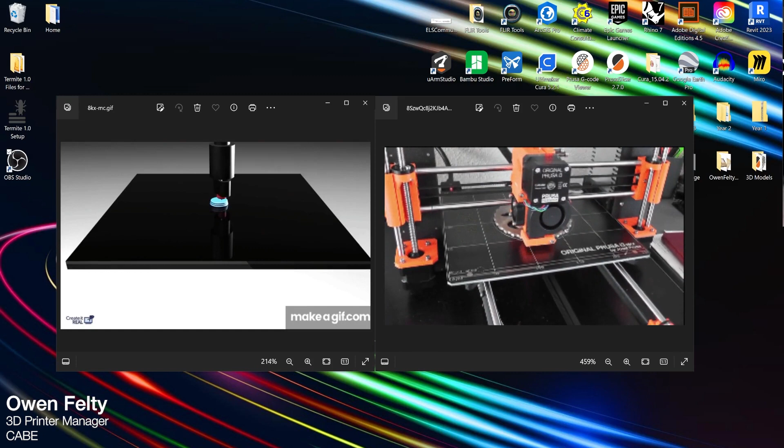Today I'm going to walk you through how to 3D print here at the college. We're going to go through what is 3D printing, how to design for 3D printing, and how to print at our print farm over in Seed. So first we'll start off with what is 3D printing.

3D printing is the process of taking a digital model from either SketchUp, Revit, Rhino, any sort of digital modeling program, and bringing it to real life via a layer by layer plastic fused deposition modeling system known as a 3D printer. A 3D printer works by taking a plastic filament and superheating it through a nozzle so it's liquid and depositing it onto a build plate, doing this layer by layer by layer.

You can see here on the screen, on the left, exactly what the printer is doing. A 3D printer usually works in three axes: an x-axis, left to right, a y-axis, front to back, and a z-axis, up and down. Utilizing all these three axes, we can create basically any sort of digital model you would like with the use of supports and some other things we'll talk about later.

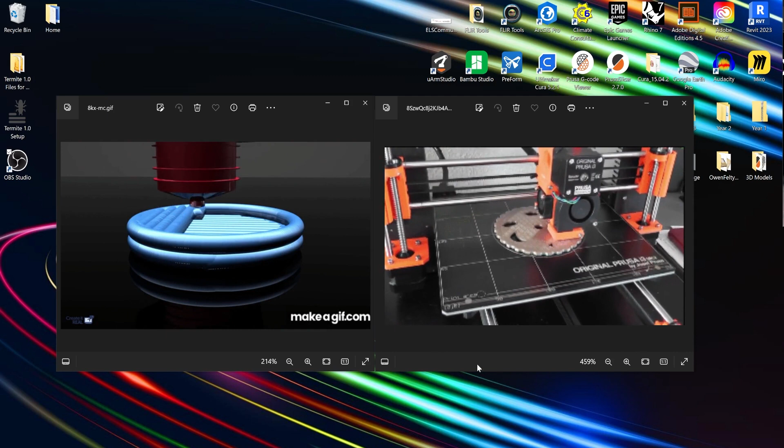You can see on the right here is an actual 3D printer, 3D printing something. These are the models of 3D printers we have in our print farm in Seed. You can also see here another time lapse of how 3D printing works - it's just layer by layer by layer.

3D printing, unlike laser cutting, takes quite a while. The average file we get in the print lab is about 8 to 10 hours. What you use 3D printing for is kind of for fast iterative models, also for very detailed small models as well. You can make some very nice screens on an architectural model with that.

We tend not to make huge, large volumes with them. Those would be better made and faster made at the wood shop. Something like that would take a ridiculous amount of time to make, so we kind of shy away from that. Any print that is over 24 hours we do not allow in the print lab here. So that is what 3D printing is.

Now we're going to move into Rhino. This tutorial is a very basic tutorial showing you how to model in Rhino. We will not be going over any other 3D modeling programs. So we'll switch over to Rhino here and get started with design for 3D printing.

Okay, so here we are in Rhino. You can see I have a basic file set up, and before we get into anything, the most important thing you have to know before you start modeling anything for 3D printing is file setup. Now when you want to 3D print something, I highly suggest making a completely separate file than your digital model is in, and then converting everything over to that, making sure you scale it correctly and the units are right.

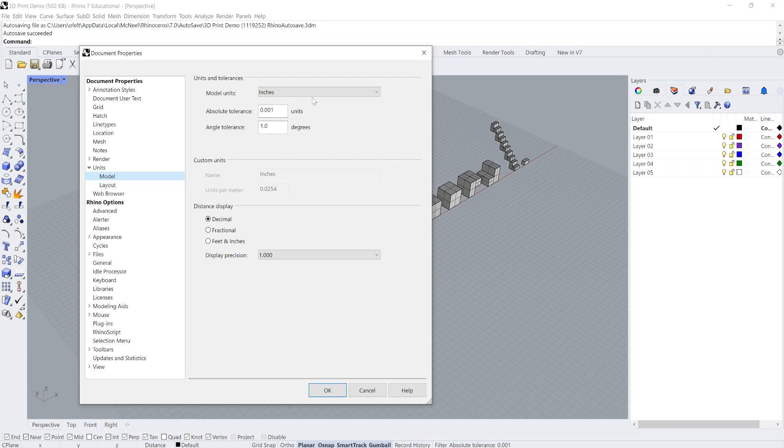With that done, the first thing we should design for is the build plate area. The build plate area of our printers in the print lab is 8 inches by 8 inches by 8 inches. So I have it right here - we have an 8 by 8 square on our x-axis, left to right, our y-axis, front to back, and our z-axis, up and down. You cannot print anything larger than 8 by 8 by 8. The printer will not function, it will not work.

I highly suggest making a little border on the inside, so what we can do is a simple offset, probably about 1/4 of an inch from the actual edge. So really the maximum you should go is 7 3/4 inches, and that goes for the z-axis as well - just so we have enough room and it's not completely right on the edge, because then we run into some build plate adhesion issues.

So we can model within this 7 3/4 by 7 3/4 by 7 3/4 cube. Make sure when you're modeling, everything is to scale. We don't want to bring something in from your digital model and have it be absolutely enormous. You want to scale it beforehand, then bring it into this file, then put it on the build plate.

When you're modeling things for 3D printing, when you're designing things for 3D printing, we have to keep a few things in mind. First of all, is whether your object that you're making is a closed or open poly surface. This is absolutely essential when 3D printing. We call this whether your model is watertight or not. What is a watertight model?

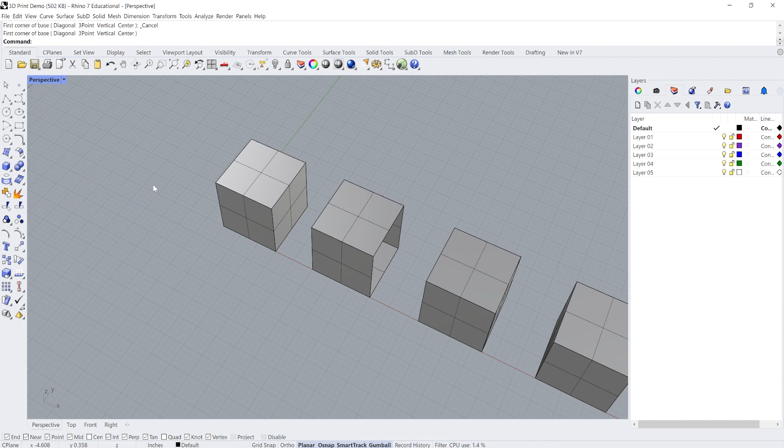You can make a closed poly surface via this sort of solid tool over here. You could do all of your solids. All of these will be closed poly surfaces. You could make a bunch of regular planes and orient them so they make a closed solid.

Kind of like this one right here. This is just a bunch of surfaces that I put together, but you could see up at this top left corner, it still says one open poly surface. If you're not very precise with the way you make surfaces, and again, these cubes are sort of the very basic modeling unit you have, your models are very likely going to be much more complicated than this.

So it might be a little difficult to find these seams. You can see these seams on this one are fairly obvious. The seams you have on yours could be microscopic, and you'll have to zoom in forever to see them. I'll show you a fancy tool that I usually use that helps me see open edges like this.

The reason this is an open poly surface is because there's open edges. So if we do a command called show edges, you can see up here in the top left, and click enter, and then we select all naked edges there. Naked edges is an edge that's not closed. So you can see here, they all highlight in pink. So we can see exactly which edges are open.

You can see we have some little overhanging edges here as well. Those don't matter too much. It's just the ones that make the poly surface open.

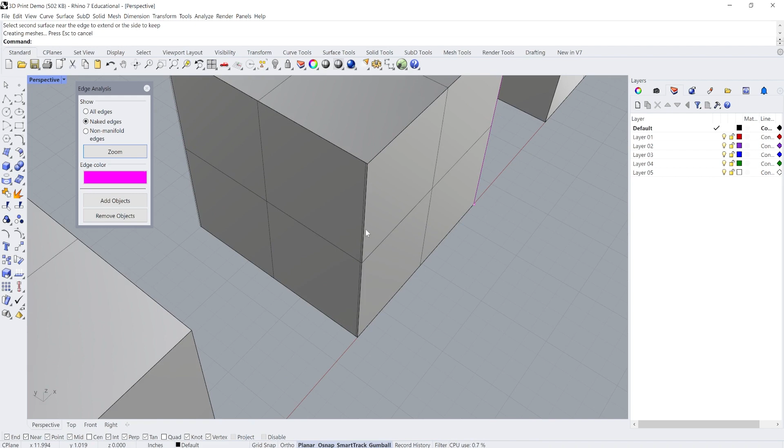So how do we fix this? Well, the naked edges, the show edges command works great with the connect surface command. So we click that, and then we click on the two surfaces that we want to connect. So we click on this surface here and this surface here, and it closes them. And you see they're no longer outlined in pink. This is exactly what we want.

And we do this with the other one over here as well. We go like that. Oh, sorry, I need to redo the command. So I right click to redo the command. First surface near the edge, so we do this one, and there you go. It is if we click on it now, it says up here, one closed poly surface.

Now you may have to do this a bunch of times for your model wherever it shows those naked edges. You can see here, if I click on this model, no more naked edges. They're all gone. You have to do this on your model for every single naked edge there is, or else it will not 3D print.

When we bring it into our other program, the program will not compute open things. If we have open objects like this, made out of planes, planes do not have any sort of thickness. It is just like a piece of paper. You can't print a piece of paper.

There is no thickness. This is a physical model we're making. Physical things exist in 3 dimensions. Planes only exist in 2 dimensions. So the printing program cannot process that. You need to make sure this is the case. And it doesn't have to be with just poly surfaces either. You can export meshes, you can export things, other solids of that nature. They just have to be closed.

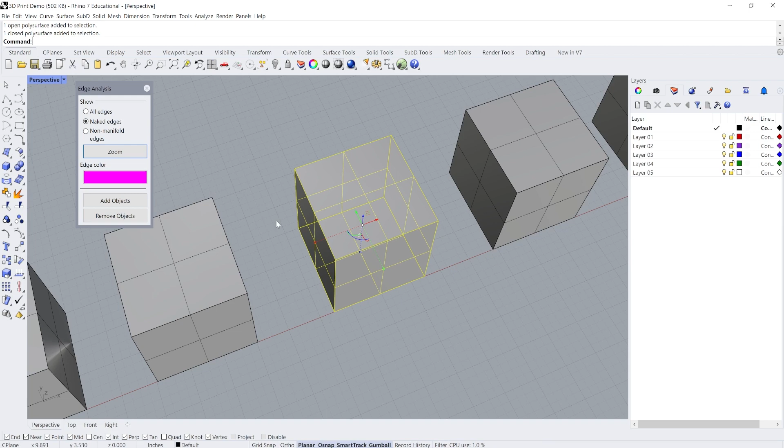Another big issue I see in the print lab is people bringing in things that aren't flat on the build plate. If things aren't flat on the build plate, they won't stick. Build plate adhesion is absolutely essential when we're 3D printing. We want things to be flat, stuck right to that build plate so they don't warp off, especially when it's cold outside.

It's very difficult to tell sometimes that things are flat, but you have to do some thorough inspections. You can just see, as we go down to the surface, this cube is ever so slightly angling back like that. And that's all it takes to mess everything up in your 3D print. So how do we fix this?

We can fix this by using the orient 3-point command. We take the edges that are skewed — this edge back here is mostly skewed, but this edge here is fine. So we use the orient 3-point command: click one point, drag along our skewed edge to another point, then drag along another edge to another point. Now we have all 3 points of this cube, so whatever we orient it to, it will be flat.

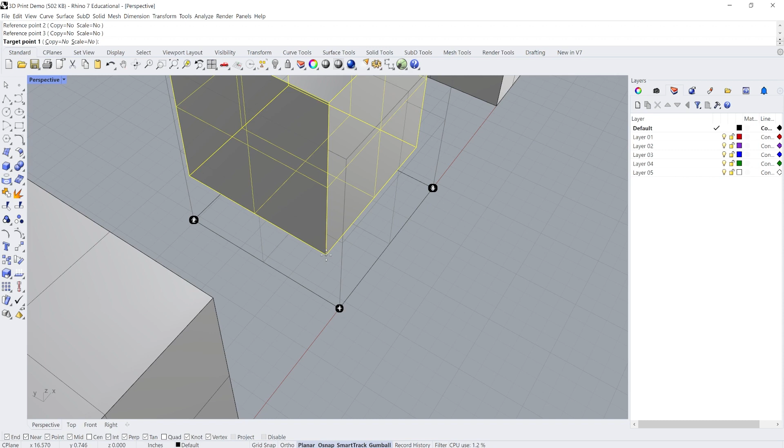As long as the object we're orienting it to is flat — and everything else in this file we know is flat. So if we go to this guy, and then here, and then here, our cube has just become flat now. If we look at it again, zoom onto it, and go down, we can see it's completely flat. That's because the Orient tool mimics all of the points of our flat cube here — it takes all the points we selected on our skewed cube and orients them to the flat points. Very simple.

All right, so that is absolutely essential. You have to remember that.

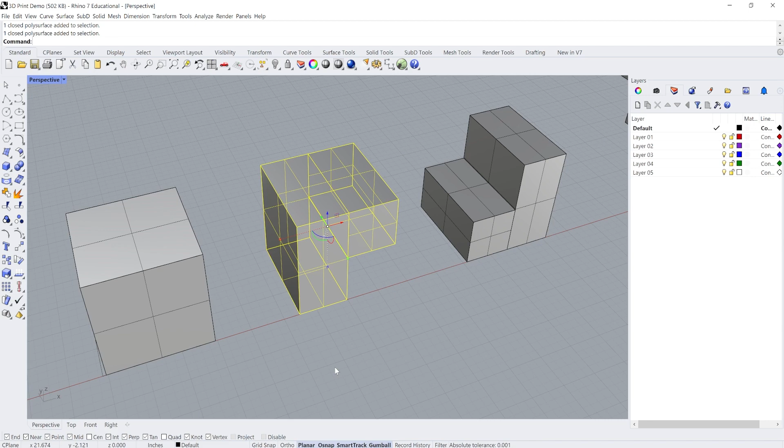Now when we go to something that is overhanging, this is a very interesting condition because it requires a little bit more tweaking — it requires being smart with 3D printing. So if you have something overhanging like this and you're using a 3D printer that builds up things layer by layer, what happens when there's nothing else to build on? When it's building this rectangle, it's building up and up, and when it has to do this layer, there's nothing there.

How does that work? In the slicing program that we're going to bring this into, it will generate something called support material. Support material goes underneath any overhang over 45 degrees. Typically, a 3D printer can print anything up to a 45-degree angle perfectly. Anything over that needs something underneath it — there's just too much of a percentage overhanging at that point for it to be stable. It needs some sort of material.

So the support material is basically just thin, gridded plastic underneath these overhangs that is very easily removed once your print is done. Support material takes a while to print too, because it's also doing that layer by layer — granted, it's not as thick and not as complicated. But if we design smartly for 3D printing, we can minimize, reduce, and sometimes eliminate support material entirely.

Just by flipping this print upside down, you can see there's no support material needed. It's going to take probably a third of the time to print now. Very simple — so if you have an overhang and you can minimize it by flipping something on its side or turning it around, do that. It's going to save you a lot of time. You have to remember 3D printing takes a while — 8 to 10 hours is about the average 3D print for what we do here at the college. You've got to keep that in mind.

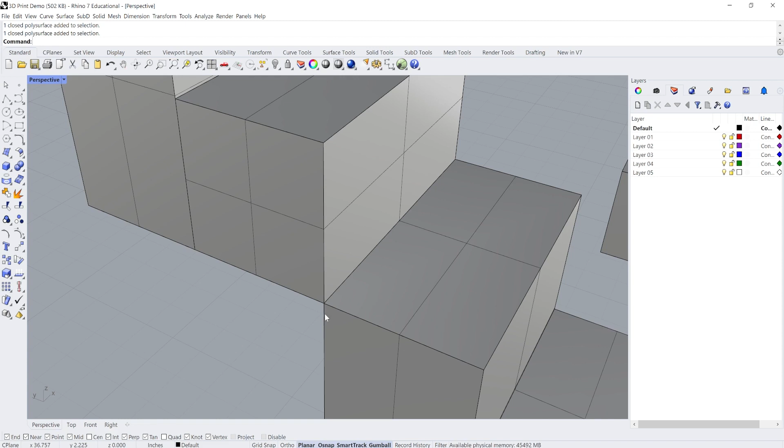So I'll show you here how to do some stairs. You can see these stairs are only joined right here at one single edge, right? But again, we're making a physical model. That is just one dimension that this exists in. It's just one singular edge. It doesn't exist in 3 dimensions.

So when this prints out, it will print this stair and this stair and this stair and this stair and this stair. It won't print them all as one solid staircase, right? To fix that, we could do something really simple. We could just take one of these little cubes, these basic cubes that I just made all of these stairs out of, and just put it here at this edge, and suddenly that edge has dimension, right?

So now, it's all one continuous sort of solid as it goes up here. So it will print this whole thing as one solid poly surface now. And typically with things like this that are a bunch of different pieces, I would Boolean union them before bringing them into our 3D printing program, just so you're making absolutely sure that it's not making any mistakes bringing it in over there.

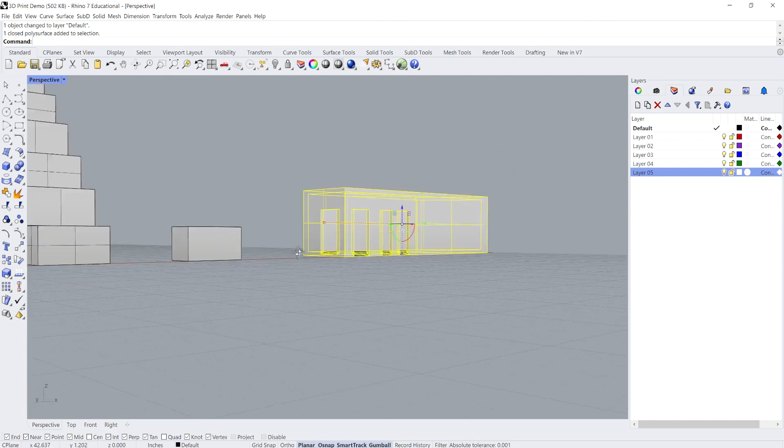Okay, so the next kind of condition we're going to look at is the building condition. We print these kind of volumes a lot at the college, obviously, with sort of walls, a floor, and a ceiling, right? The problem with printing buildings as is, just like this, is they tend to overhang, right? Roofs overhang to create an interior space. It's architecture, right?

But when we're 3D printing something like this, and we have an overhang, that means that overhang needs support material, right? So if we were to print this as is, this entire interior space would be filled with support material. And if we were to print it like that, it would, one, take quite a long time to print all of that support material on the inside, and two, be very difficult to take out. Even with a pair of pliers or tweezers, it would still be very difficult. So what can we do to address this?

Well, I'm going to teach you how to break apart a model. This is essential in designing for 3D printing, breaking things apart to strategically 3D print them efficiently, saving you as much time as possible. So what I suggest for printing building volumes is taking the roof off, completely splitting it from the rest of the model and printing it separately.

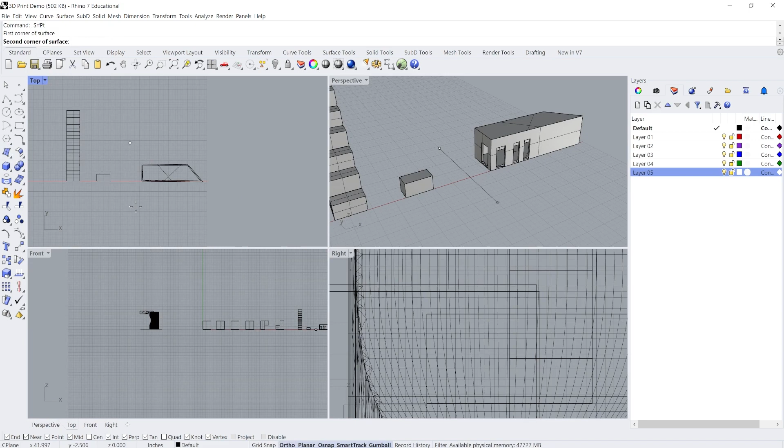So we can do that pretty easily just by making a surface. We can click on the surface tool here. We can go to our top view and we can create a surface that completely encloses the model here. So there we go. It doesn't have to be perfect. It just needs to split the model. So here we have our surface, and now we're going to move it up until we can see that it's clear of all our windows here and that it's solely cutting through our roof here.

Okay, and then it's as simple as just typing in a Boolean split. We select our building, press enter, and then we select our cutting object and press enter. Okay, and now our roof and our building are two separate objects. So if we go ahead and hide our surface here, and we take our roof off, we can see that it's split like this.

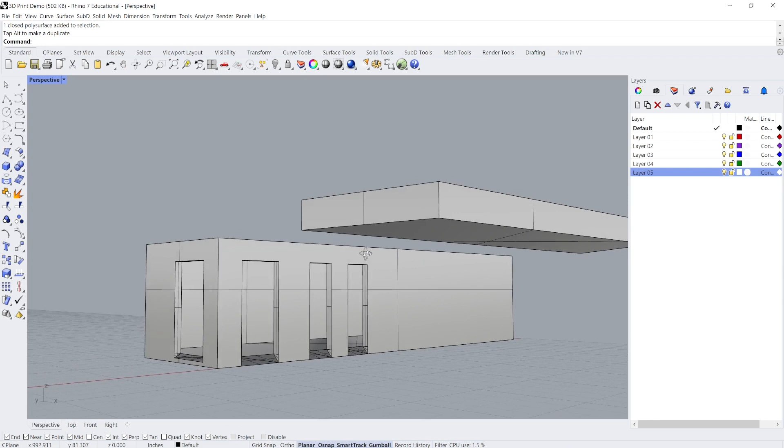Now, we wouldn't print it as is, right? We would take this, first of all, and flip it upside down, because if we had it in the other position, it would still need to be filled with support material. And we could see our roof here is just slightly sloped, right? It's a sloped roof condition, so it collects water. But that means when we're 3D printing it, it's not flat, and not being flat isn't good for build plate adhesion, as I told you earlier.

So we can use the other thing that we learned, our orient 3-point command. We can take our reference point of here. This is the edge that is skewed to here, and we could put it against something that we know is flat, like these cubes over here. So we go here, here, and here. And now we know our object is flat.

So if we move it, we take it over here and bring it over here. We can move it this way, and now these objects are flat on the build plate. Well, this one is turned over again. You have to look out for that when you're using the orient tool.

Sometimes it flips over your object. But there, this is how you would print a volume, an enclosed volume. And then after you're done 3D printing this, you would just take this volume, put a bit of super glue on it, and then attach it to the top. Right? That saves you hours of 3D printing because you don't have to put in that support material.

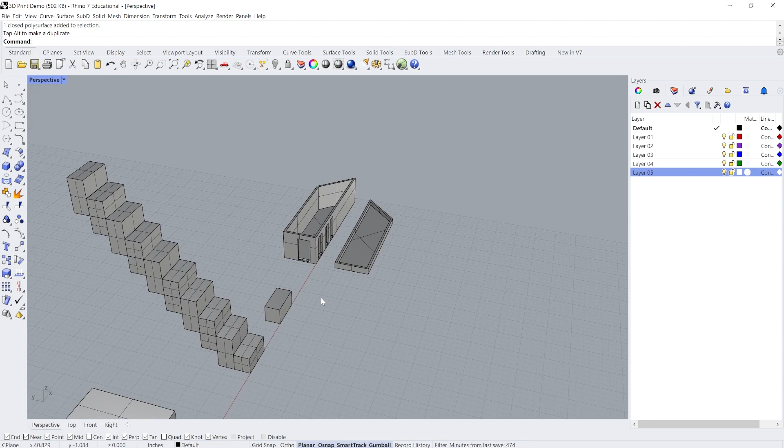So how do we actually export this from Rhino and bring it into our 3D printing program? So what you're going to do is take your volume, click on it, make sure it says one closed polysurface, and then we're going to type in export. This is going to bring you to some random folder. Make sure you know what folder you're bringing it into. I think this one's fine. And then we're going to hit this little drop-down menu here that says Rhino 7 .3dm models.

We're going to change our file format from .3dm, and we're going to scroll all the way down to the bottom where it says .stl right here, stereolithography. This is the file format that every single 3D print should be exported as. So we're going to click that, and we're going to name it whatever we want. I'm going to name it 3D Print 1. And then there we go. Now, this is our other menu that pops up. These are our options for our STL.

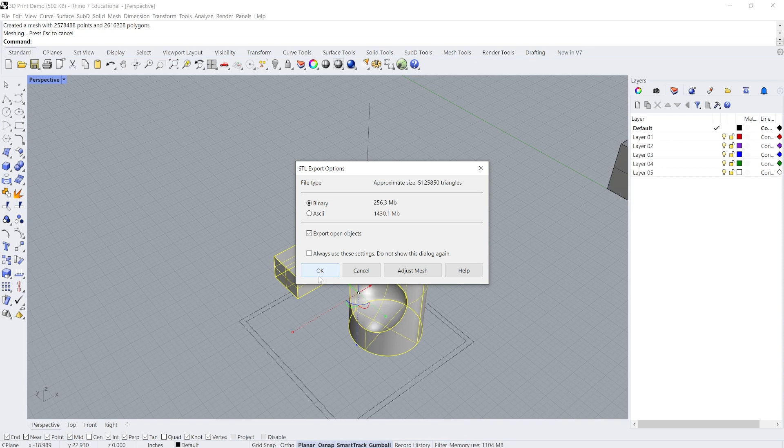I recommend, if you're doing curves and curvilinear surfaces, especially if you're working with SubDs in Rhino, to mesh it first. So turning it from a polysurface to a mesh in Rhino simply by typing in the command prompt mesh and then pressing enter. And then that just simplifies the geometry. If you're running into problems and your STL file is taking forever, mesh it first, then export it as an STL. All right, so back to the STL export options.

This should always be check marked as binary. If it's checked to ASCII, check mark it to binary. And then click OK again. I'll show you here what I mean by meshing something. You just click on your object, you type in mesh, you put in more polygons, and then instead of exporting this closed polysurface, it says one closed mesh, you export this instead, and it should export much quicker. But now, since we have our .stl file, I'm going to take us out of Rhino and show you how to download our slicing software to convert our Rhino model into something that can be 3D printed.

Okay, so now we're going to download our slicing program. Now, what is a slicing program? A slicing program takes our digital Rhino model, or digital whatever model, and converts it into individual layers of plastic. It's called a slicing program because it actually slices your model into 1,000 or so layers of plastic, and then generates a type of code that the robotic 3D printer can interpret and print. And it has a bunch of settings and parameters that you can adjust to make it go faster, make it print in a specific way, things like that.

The slicing software we're going to use is called PrusaSlicer. So we're going to go in Google and type in PrusaSlicer and press enter. I'm using Chrome here, so it should be the first link. You'll be brought to this page upon clicking on it. And right here, you'll click download for Windows. Everyone should have a Windows laptop, so everyone should click download for Windows. And you'll just wait 10 seconds. See down here, there's a countdown. Don't put your email in. They try to get your email. Don't let them.

Also, it will create a shortcut on your desktop, and it looks like this right here. It will install two things: PrusaSlicer, the actual app, and PrusaSlicer G-code viewer. We don't worry about this for now. We'll just worry about this. So once you have it downloaded, it should open up automatically. I'm just going to open it up here for you.

Alright, once you open up PrusaSlicer, you should be prompted with this screen. This is a configuration wizard. This is going to install the presets for our specific printers that we have in the laser lab. So we're going to go down here and click next. I think by default, PrusaSlicer has one of these buttons here checked. I think you should uncheck one of these buttons that are up here.

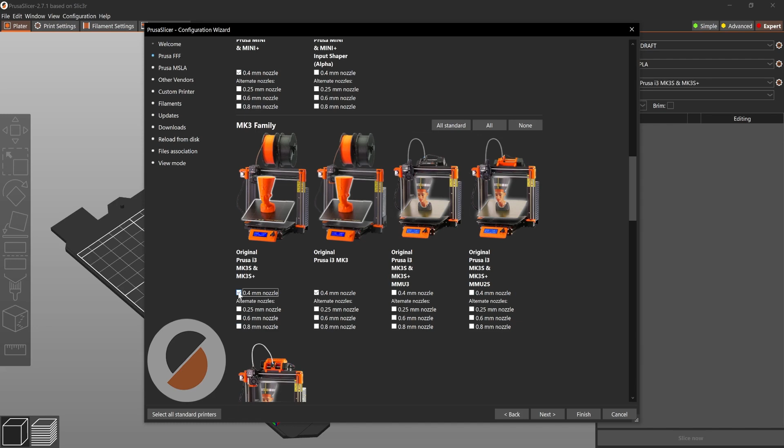After you do that, we'll scroll down until we see Mark III family. You can see it's right here, Mark III family. The printer we have is this first one here, the Prusa i3 Mark IIIS. And we're going to check mark, I already have a check mark here, but you have to check mark 0.4 millimeter nozzle, never 0.25, never 0.6, never 0.8. All of the printers we have are 0.4 millimeter nozzles. So after you do that, you can click finish, since that's the only printers we'll be installing.

And then you are prompted with our configuration view here. Now, this is kind of very similar to Rhino. You can hold right click to pan around. It's actually the opposite of Rhino, sorry. You can hold right click to pan around, and you can hold left click to rotate around our build plate here. This is that 8-inch by 8-inch by 8-inch build plate we have. This is what it'll look like when you go into the print lab. It'll have this little title here of what the printer is and this grid on it.

You could tell you're on the right printer by it saying Mark III. We may be getting Mark IV printers in the future, and you'll be able to determine which printer you have because it will say Mark IV here instead, and then we'll just install the preset for a Mark IV instead of a Mark III by going up here to configuration wizard, press don't install, and then running through the configuration wizard and check marking the Mark IV printer right here at the 0.4 millimeter nozzle.

Okay, so right click to pan, left click to rotate around the build plate here. And then we can bring in our model via this cube with the plus sign up here. So right now you need to go find where you saved your model. I believe mine is here. And it's in here, and then there it is. It'll look like this. This is a PrusaSlicer file. It's your STL file, and all you have to do is press open. Might take a little bit to load in.

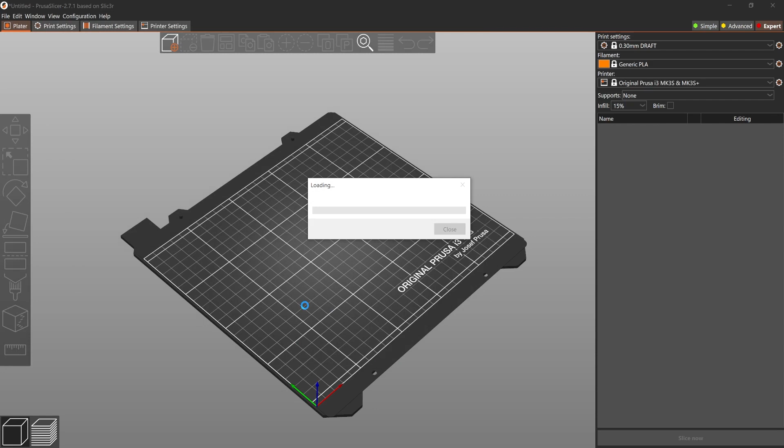Just be patient. Now, my model has come in very, very small, even though I correctly scaled it and put it on the build plate and everything in Rhino. That is perfectly fine, okay? Sometimes it does this. Most slicing programs work in default millimeter units, right? I have you start in inches in Rhino because most of the time, it converts it over into millimeters just fine, brings it into scale. Sometimes, though, it brings it in very small. There's a very easy fix for this.

You can see right here on the bottom, it says scale factors, and there's three 100s. That means your scale is at 100% right now. So if we change this from 100% to 2,540 and press enter, it scales it uniformly, and that 2,540 is the scale factor from millimeters to inches. So this, right now, is at the correct size we scaled it in Rhino.

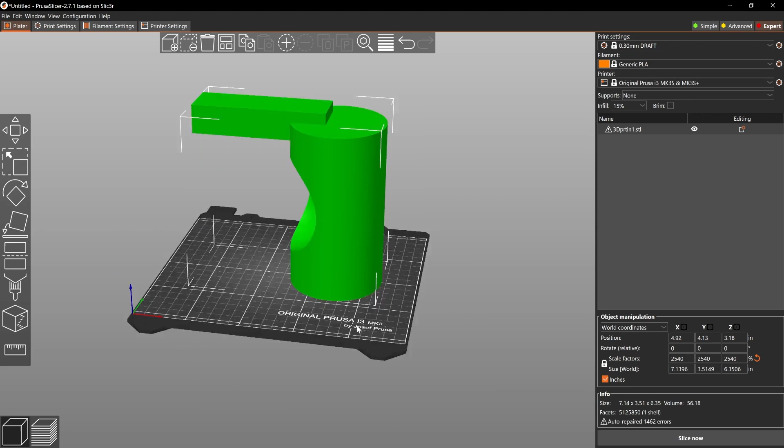Alternatively, when you bring in your model to Prusaslicer and it correctly interprets it from inches into millimeters, you should be prompted with this screen. It's very simple, this screen. All you have to do is click yes, and it brings it in inches just fine. Okay? And we can go around it. We can see what it looks like. Now, it's green right now. Green is good. That means it will fit in the build plate.

If we have it just outside the build plate, it turns blue. Right? Same if you click off of it. If you click off of it, it turns orange. That just means you don't have it selected, right? Just like something in Rhino turns yellow when you select it, right? And if we put it outside the build plate and we deselect it, it'll be blue, okay?

Now, to easily arrange something on the build plate, you could click this little square within squares up here. It says Arrange. You just click on that, and it puts it right in the build plate here. Simple as that, okay? You could use your pan and rotate tools to look at your model every which way, make sure everything is fine. I'm not seeing any gaps or anything like that, so our model looks good.

Okay, now we'll run through a few settings here on the right. This is what gives you most control over your 3D print. These are things that will affect time, quality, how it looks, everything. So the first setting we have here is our layer height. Now, what is layer height? You know how this slicing software is called a slicing software because it slices it into a bunch of individual layers of plastic. Well, those individual layers of plastic can be different heights.

The lesser this number is, the more layers there'll be because each layer will be very thin, so it has to build more and more up to build your model. The greater this number is, the less layers you will have. So right now we're on 0.3 millimeter draft. So each layer is 0.3 millimeters, so that means there's less layers than 0.05 millimeters. Right now, the quickest one is 0.3 millimeter draft. So the less layers you have, the less time it needs to print, right? The more layers you have, the more time it's going to print. If you're running into time issues for your print, the easiest way to reduce time is to adjust layer height.

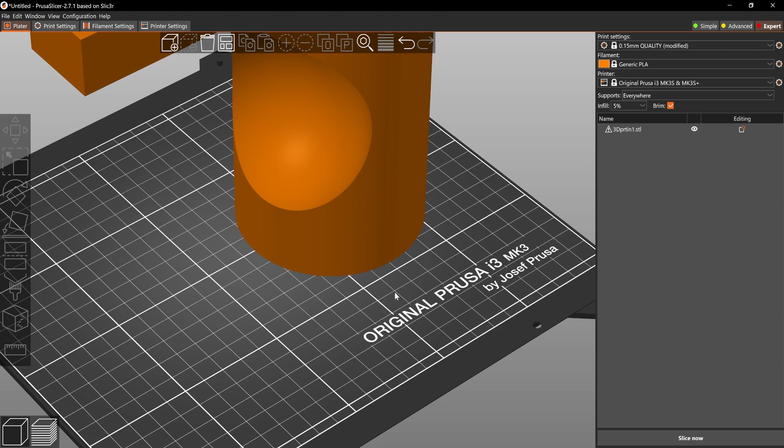In cases where you don't want to have brim checked, if you're doing very, very tiny things, especially like little screens or little strips or something, you don't want to have a brim on that because that'll be very difficult to take off later. But for something like this, big massing models, you definitely want a brim on there, or else this thing is not going to work.

Right, so this should be your default settings. For this print, I'm going to put it on draft as well. I'm going to click transfer as well. Anytime you change a setting, you have to transfer all of them. So yeah, these should be your defaults as you're going in to do a 3D print here in PrusaSlicer. Now to actually convert it from your digital model into physical layers of plastic, we go down here to the bottom right and hit Slice Now.

Give it a minute, you can see the progress bar down here. Sometimes it takes a while for this model since there's some curves and it's a bit larger. I should have meshed this beforehand before exporting it as STL in Rhino. Do as I say, not as I do. But we can see it ghosts out here when it's slicing. As long as it ghosts, that means it's slicing. So the second it turns solid here, we can see its sliced view.

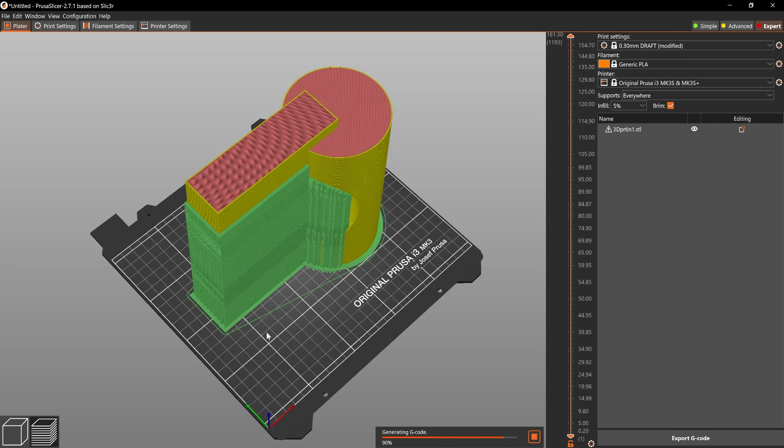You can see this operates in the same XYZ as Rhino. You have X, which is left and right. You have Y, which is back and forth. And you have Z, which is up and down. Wow. That is a lot of supports. You can see all of the supports here are in bright green. This is that gridded support material that it creates on all overhang conditions over 45 degrees. You can see this is over 45 degrees here, so it creates support for the inside of this dome.

You can see also the model looks kind of stripy and weird right now. That's because it's displaying it all in individual little layers of plastic. The orange are exterior perimeters. The yellow is an interior perimeter. Red is simply the top plate. Blue is an overhang perimeter. And this turquoise down here is the brim. You can see this little brim that sticks to the model to make sure it sticks to the build plate. And there's this other turquoise element that goes around your entire model. That's a skirt.

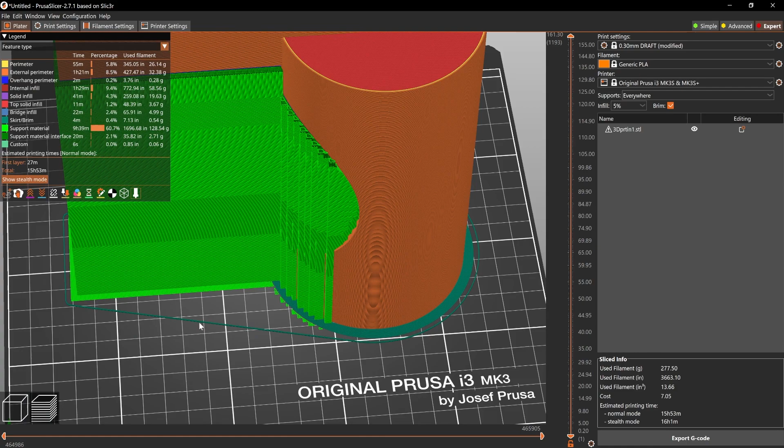To know that your model is entirely flat, to make sure there's no parts sticking up, and that you've oriented it correctly in Rhino, you can check by seeing if your skirt goes all the way around your entire model. If it doesn't, it would go through this cylinder halfway, meaning your model is skewed. Mine is perfectly flat, so it goes all the way around on the edge, so we know it's flat.

Another way to check if something is flat, and to check our infill density, is to scroll through each individual layer of plastic it's going to print. You do that by holding left click on the little arrow up here and dragging down. You can see it drags through each layer, showing the infill grid pattern in red. If we go down to the first layer, it's entirely flat here, with no skewing or angle. It is completely flat, which is exactly what we want.

This purple is the solid infill on the bottom, and we can go all the way up with that red infill showing. I can show you how we can change our infill.

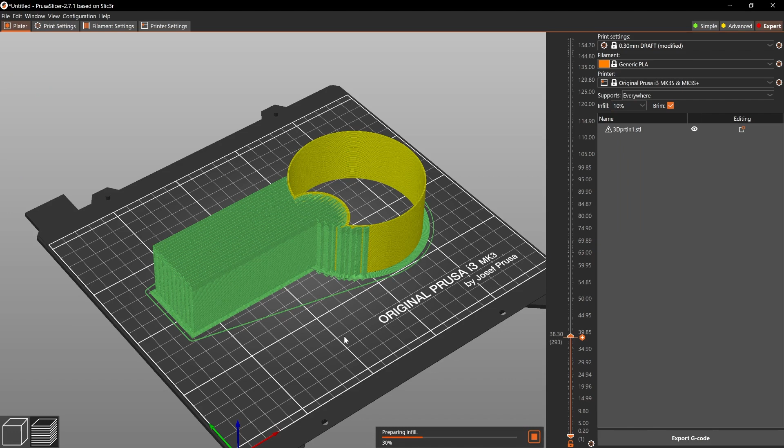We could bring it up to 10 instead. Every time you change a setting, you'll see it goes yellow and all the information up here disappears, so you have to reslice it. You click slice again at the bottom right, and we wait for it to slice again. It might take a little bit, so be patient. You can see the density of our infill grid has increased, and that will affect your time drastically.

Right here you can see our total time for the 3D print is 17 hours and 11 minutes. Beforehand, when our infill was at 5%, less dense in the middle, it was at 15 hours. So just bumping it up to 10% cost us 2 hours of time.

So you have to be very particular with the settings you use. I'm not going to put it back down at 5%, keep it at 10%, and bring our layer height down to 0.15 speed, then click transfer to slice the whole thing again. I'm going to show you just how drastic the time changes just by changing our layer height—it'll probably go from 17 hours to well over 24 now.

We're halving that layer height, so there's double the amount of layers to print—it probably went from 1,000 layers to 2,000. Now at 20 hours, we just added 3 hours to our total printing time. So now you can see the effect these settings have on our print.

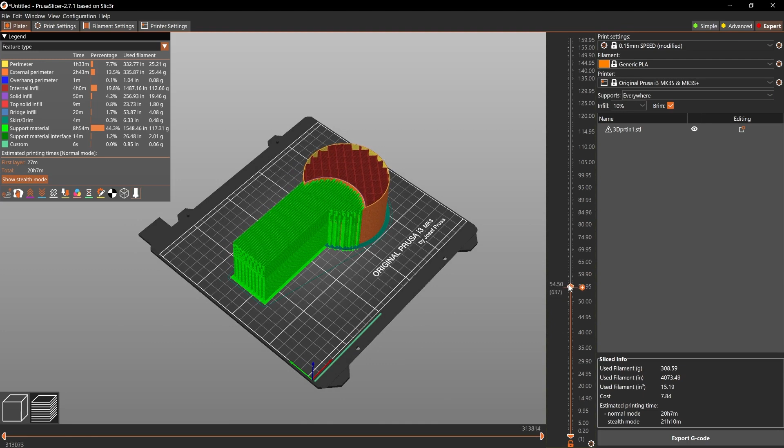We can scroll all the way up through our layers to complete them. Right now you can see the time breakdown of each component of your 3D print—the perimeters in orange, the tops, and you can see our support material is taking up 8 hours of time. Now there are a few different types of support material patterns to reduce your time.

The way to change the support material configuration is to first go up here—I'm sure yours says simple. These are just different types of settings: simple, advanced, and expert settings. What I want you to do is click on expert settings. I'm already on them, so when you click it, some things should change and look more like this.

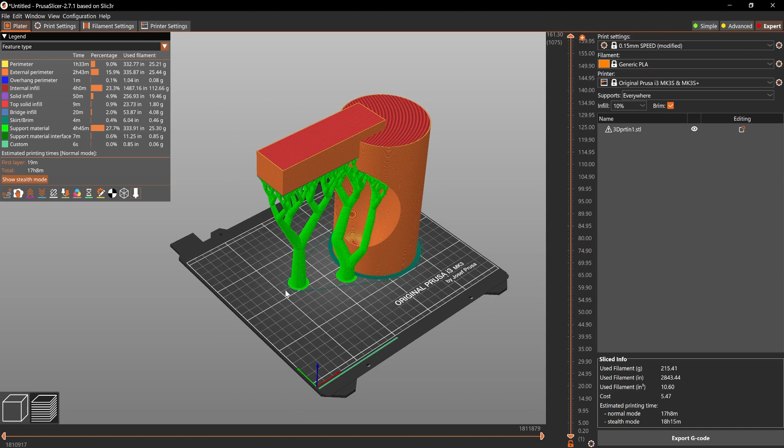After that, we're going to go into print settings, then down to support material. From there, we'll see where it says grid next to style, and we're going to switch to organic. Organic supports create strange tree-like branches from the bottom of the build plate all the way up to our overhang condition. I highly recommend organic supports for overhangs that are significantly above the build plate. For things with low overhang on the build plate, a typical support pattern is fine, but for something this high above the build plate, it's much more time efficient to do a tree, or organic, support.

You can see here the weird sort of tree branches it makes as it goes up. This conserves a lot of material, and it obviously conserves a lot of time as well.

There's another type of support pattern for if your overhang is lower on the build plate. So instead of organic, we can go to snug. These generate the more typical blocky, gridded type of support material, but they are much more easily removed than the grid type, and they take a lot less time as well. They're not nearly as dense. I suggest never using the grid style of support material, never using this setting. Always use snug or organic, depending on your situation.

We wait for this to slice again. You can see this takes 18 hours now. With this support material, it doesn't look quite different from the grid, but I promise you it is quite different. Much easier to remove.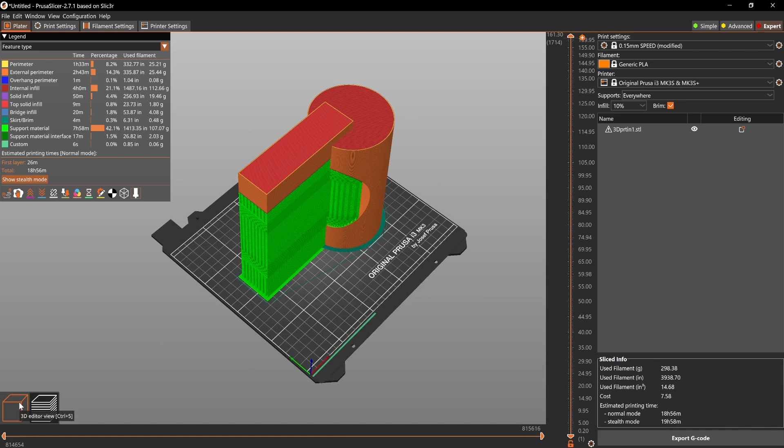To return to our configuration view, we can click on this little cube at the bottom left. This cycles through from sliced view to your regular configuration view, and you can go back and forth. Down here as well, when you're out of your sliced view, you can see the total time.

Right now we're going to click on our model, and we're going to see a number of tools over here. Now that we're in expert mode, we can see all of our full tools. This first tool is simply just a moving tool, so you can move left and right, back and forth, and up and down as well.

This is our scale tool. If things come in at a weird scale, if you want to make things a little bit bigger, but don't want to go through the process of going through Rhino, if it's not something that needs to be very precise, you can just scale it here in PrusaSlicer. Or if something's just a little too big, you could bring it down just to make it print. We can scale it way down, or way big, or scale in one direction, or another direction. You don't want to ever scale in these directions unless you're doing something funky. You always want to scale diagonally with these orange cubes, so you're scaling uniformly.

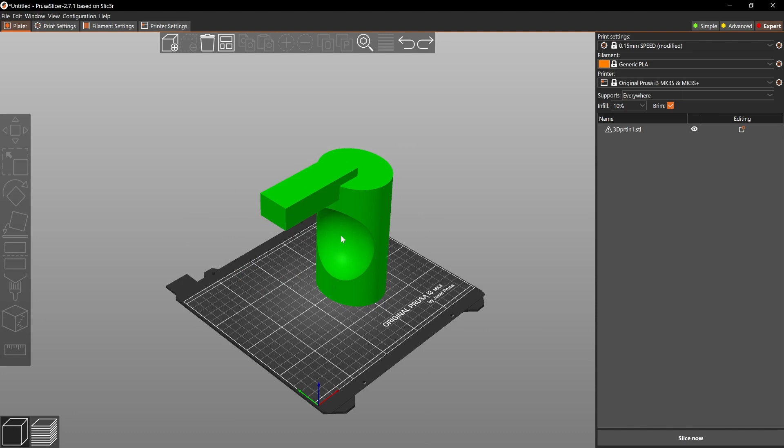I don't really suggest scaling things here directly in PrusaSlicer. I would much rather do it in Rhino instead, especially for something like a final model that needs to be very precise, and then just tweak it from there as you go along.

The next tool down here is our rotate tool. It's kind of like a gumball tool in Rhino. You can left click and hold this green box up here, and rotate along that axis. If you want to snap to a certain degree, you hover over the white line, and it snaps to every 5 degrees. So if you want to snap to 90, you hold over the 90, if you want 180, you hold over the 180, and so on, for each angle.

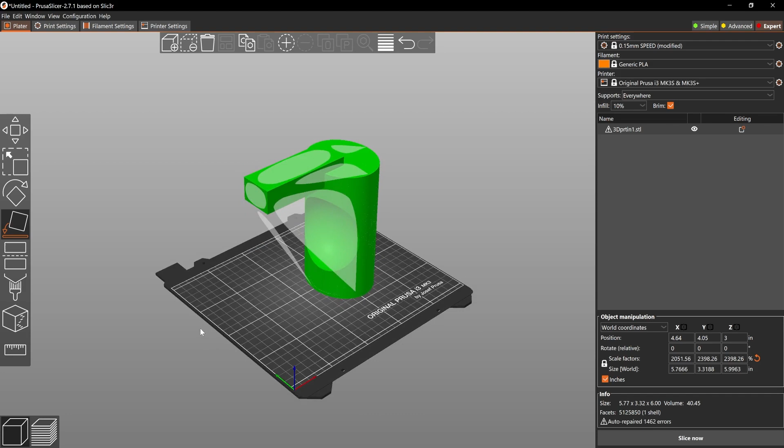Below that is the place on face tool. This could be very helpful if you didn't quite orient something correctly in Rhino. It gives you varying faces of your model interpreted from the STL file. You click on this white surface, and it orients it on that surface. If we click to this surface here, it orients it on that one. If we click to this one here, it orients on that one. If we want it flat again, we click on the bottom and it orients on that one. Very simple, and very easy in a pinch if you're doing things quickly.

Like if you're doing the roofs to your little building, like I did in Rhino, where you're cutting them off and rotating them over, if you didn't bring it in right, rotated the wrong way or something, you could use this tool to put it on its other face, just like that, or put it on this face, just like that.

Another very valuable tool is the cut tool. You can cut things here in Prusaslicer. I don't really recommend doing this unless you're doing fun models that don't need precise calculations to fit into each other. For quick last minute things it's fine, but I recommend doing precise cutting in Rhino instead.

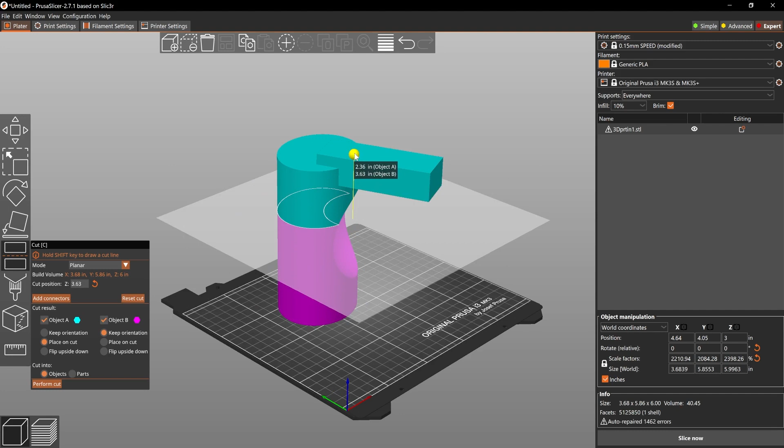If you do need to use this tool, you can hold left click on this little ball and it'll go up and down. If you need to rotate the cutting plane, it works just like the rotate tool. You hold left click on one of these arrows and snap to one of the white lines, in either direction.

Once you're at the angle you want to cut, you go down here and click Perform Cut. There are a few options here I won't get into, but you just hit Perform Cut. It'll take a minute because it needs to interpret the new cut mesh. And there, it has cut it into two pieces now.

We'll click off of them, and now we can click on them and hold left click to drag them around however we please. So they're two separate pieces, two separate files now. I'm going to undo that because I don't want that, but that's just showing you how the tool works in case you want to do something like that.

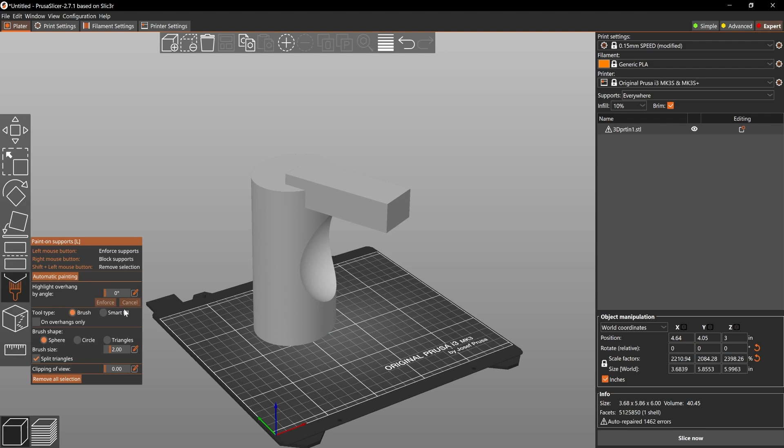Below that is the Paint on Supports command. This is essential if you don't want to use the auto-generated supports that exist within Prusaslicer. They're very important if you need to do very precise supports only on a few surfaces.

You can see there's a little dark sphere brush I have selected. Down here it shows our brush shape, our tool type - we have a brush and a sphere. We can change it to a simple circle, or to a triangle. Our whole STL file is tessellated, meshed, made up of triangles, so we can select one of those triangles if we want.

What I like to do is not use a brush, and go down here to the Smart Fill command. Instead of doing a small section, it does the whole face - it interprets the different faces from your mesh, so you could do it like that instead. If you want to remove your selection, you hit Remove All Selection, and it deletes all of them.

Right now it's generating supports here, and maybe I don't want them to generate. Instead of left clicking to enforce supports there, I can right click to exclude supports there, so it goes red if you don't want supports. Now, to put this enforcer into effect, I have to switch supports from everywhere to support enforcers only - we're creating different types of support enforcers.

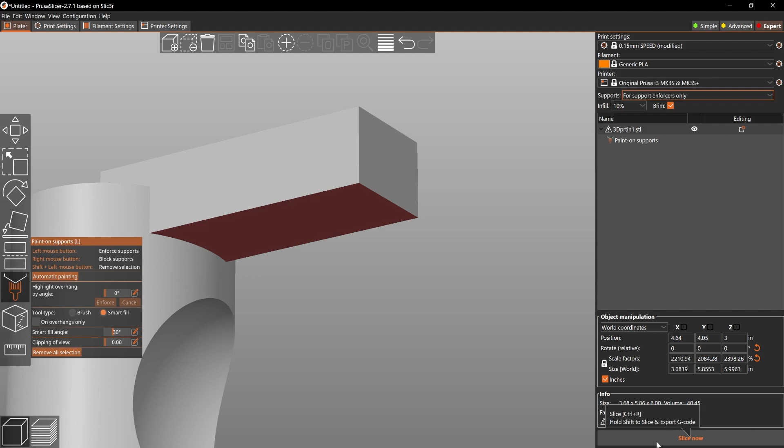So if we slice it again, and wait, now as you can see there are no supports on our overhang. Obviously you wouldn't do this in a realistic situation because it wouldn't print, but I'm just showing you how the tool works.

If we go back into our configuration view now and change this from red to blue, we can have our supports generate again. Just like that, they're back.

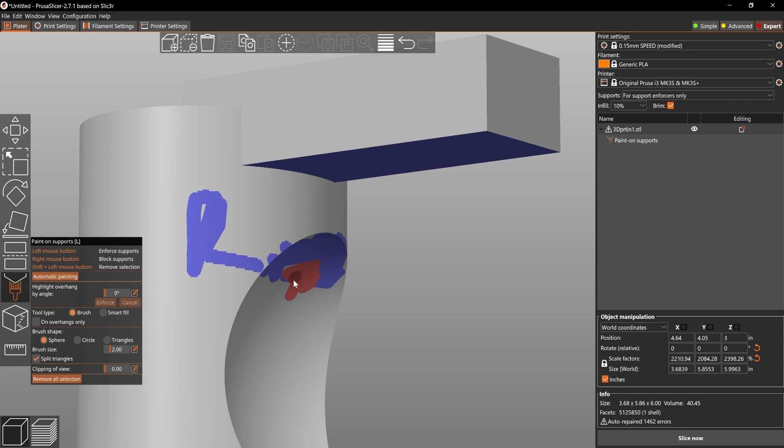We can go back to our configuration tool, and instead of using Smart Fill on Paint on Supports, we could use the brush. With our sphere brush size selected, we can paint on supports instead, and it does the exact same thing - it generates supports where it's blue, and where it's red, instead of holding left click we hold right click, and it doesn't make supports there.

You want to make sure you're doing this on overhangs - if you do it just on the wall here, it won't do anything. So I'll now remove all of my selections, and make sure if you're not doing supports anymore, you change it back to supports everywhere.

Okay. And below that is seam painting. We're not going to get into that today. And you can also use a measure tool here in PrusaSlicer, just to measure certain distances from here to here or from up to down. You shouldn't really need to do this. You should know other things because you'll have your Rhino model open as well. But just in case, here it is.

Before we go and actually print this in the laser lab, what I'm going to do is save this file. So all I'm simply going to do is go up here to the top left and hit Save Project As. Okay? You can see I already saved a previous version of it, but I'll save another version of it, so we'll just call this 3D Print Video Demo 2222. And this will save it as a .3mf file. Now, we'll press Save,

and it should save. Now it's important to know that this is not the file you will put on the 3D printer. When we go into the laser lab, what we should do is open up this .3mf file. And then from this .3mf file, we will hit slice, and then we will wait for it to slice. Okay, this is the file that you would like to save onto the SD card once we're in the laser lab. But we'll get into that once we're over there.

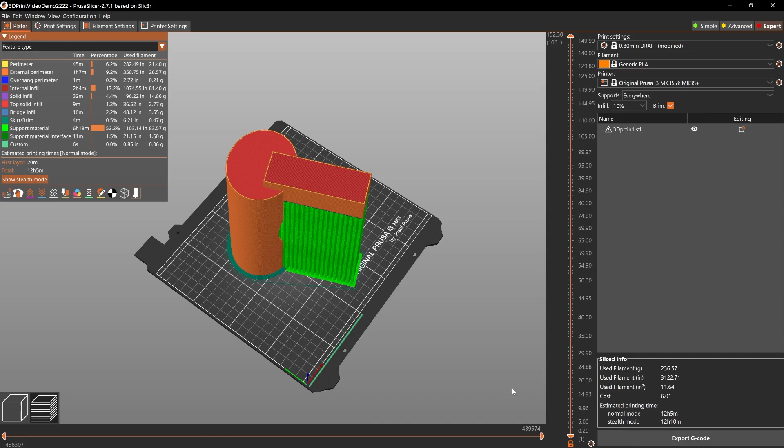Okay, so here we are at the Seed Center. The Seed Center is located behind Deck and Reichland House here at the end of this road. This is where our print lab and laser lab facilities are located. To get into the Seed Center, of course, you need your campus ID, which I have here in my wallet, and you just scan the door and it opens. You have to do this a second time, and the door opens again.

So once you're in Seed, you'll go straight back this hallway, and then right here, before the vending machine, we'll take a left. Here are the doors leading to the laser lab. You'll also need your campus key to get into this room. Mine is inside my wallet again, and you have to scan right here. The door opens, you turn, and you push to open.

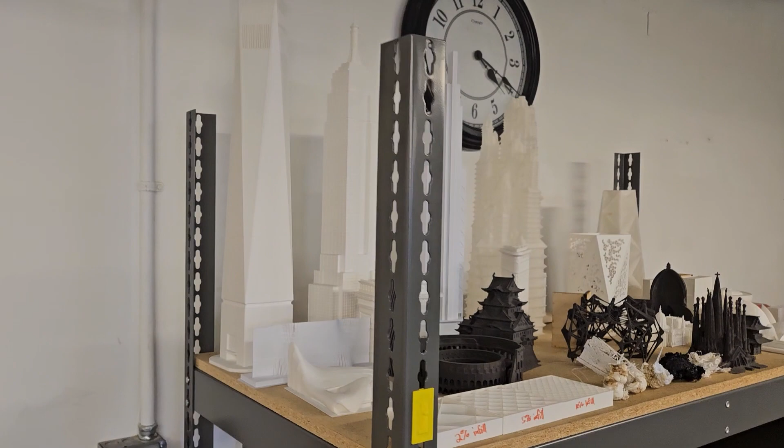So here we are in the laser lab. Our laser cutters and our laser cutter storage system is over here. And here is the stacks for our 3D printers. Now, some of the first things you'll notice when you come into the print farm is that there are a few models over here showcasing what 3D printing is capable of. Here are a few examples of infill patterns like I showed in PrusaSlicer. You can see we have 2%, 5%, and 10% here in real life. You can see that grid pattern on the inside of the model.

You can see a few other examples of things that we can do. We could print very delicate screens, curvilinear formwork here, and then huge multi-part skyscrapers here. This is, I believe, in 3 parts. There's a bunch of different things you can do. These gray prints here are with our powder printer, which is right over here, and there will be a separate tutorial on how to set up files for that.

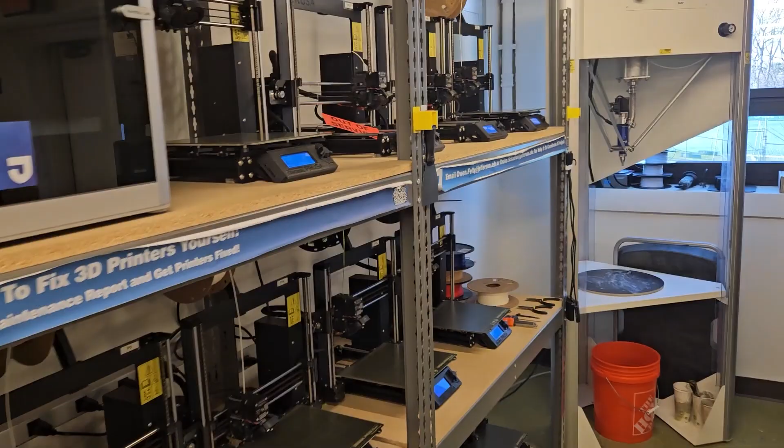Okay, so going away from that and over to our actual print stacks right here. This is where the majority of our 3D printers are. I believe we have 14 of them right now. These are our workhorse printers. These are our Prusa MK3S's, like we set up in the video. This is a specialty printer up here. There will be a separate tutorial for file setup on this one. It can print very quickly, and it can print with multiple colors of filament. That's what this thing up here does.

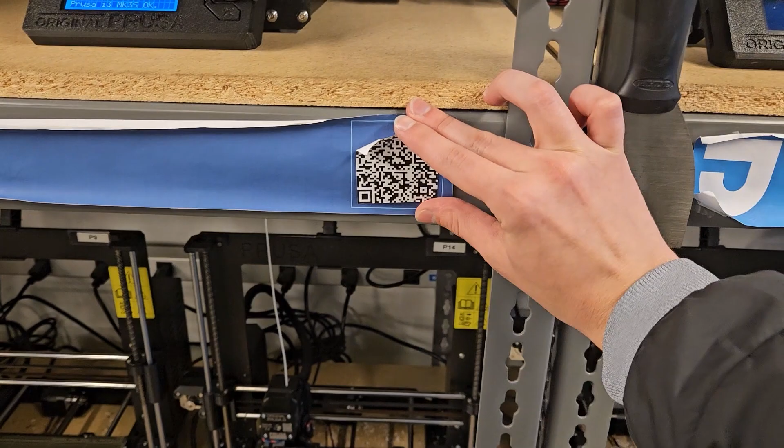Okay, some other things to note are, of course, these signs here, right? If you need any help with anything, mine and Drake's email is right here. You can shoot us an email if there's any problems with anything you encounter in the print lab. But if you do encounter some problems with the printers themselves, please, please, please submit a maintenance report by scanning this QR code here. It's right here. These signs will be replaced. Right now they're not in the best condition. Those will be fixed pretty soon.

Okay, and here are our 3D printers. Here they are. You can see right there, it says Prusa i3 MK3S. Okay, so this is what you want to be looking for. And it's not running right now. There's nothing going on it. This is the machine we will want to use. You are free to use all of these machines as long as they are not running. As long as they're stopped like they are right here, it's perfectly fine to use. Even if it has an SD card in it, like this one right here, as long as it's not running and there's nothing on it, you're free to take the SD card out and use it.

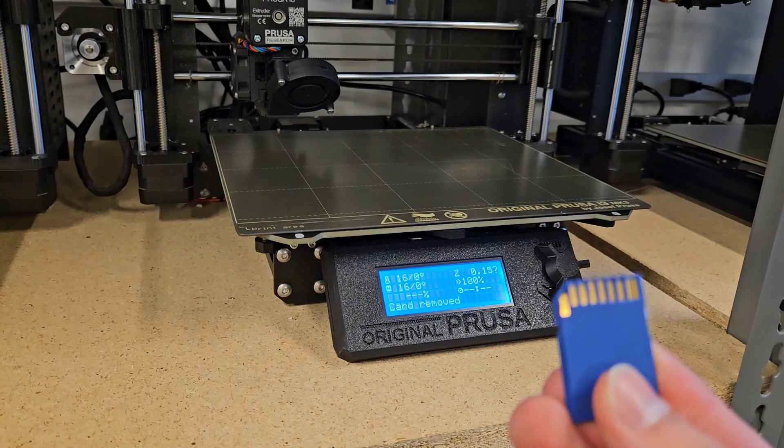Additionally, if you see a 3D printer that is either off, so the screen is off, or has one of these tags on it, that means that the printer is not serviceable. Please do not touch it. Please do not try and use it under any circumstances. It is broken and requires substantial amounts of work to fix.

Okay, so here I've set up my laptop, and you're free to set up your laptop at any one of these seats here next to the print farm and plug your laptop in case you need to do some file editing while you're setting up your 3D print. So here I have a file we saved just a short bit ago, 3D print video demo 2222. This is the .3mf file, so what you're going to do is double click on this to open it, and it should open PrusaSlicer shortly.

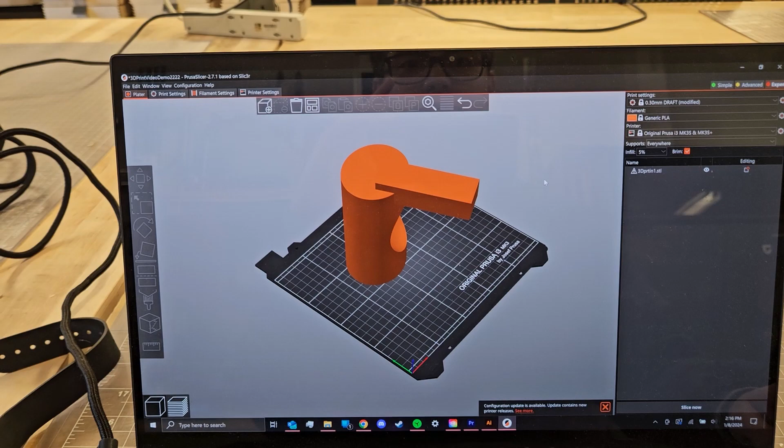Okay, so here it's opened. You'll be prompted with a box. When it opens up the file, you just want to press OK, and then it should load in for you with all of your settings that you previously saved. Okay, so here's our model, with all the correct settings that we put in yesterday. I'm going to turn our infill from 10 to 5%. I think that's best for this 3D print. We don't need to go excessive with the infill. It's not something that needs to be that strong, right?

Okay, so now, once we're in this screen, we'll go down to the bottom right, and we'll hit Slice Now. And we'll wait for the model to slice. Okay, so our model has successfully sliced. You can see right up here is our total time. It is under 24 hours, so it is okay to print. And now, from this menu, what you want to do is turn around and grab an SD card. These are the main way that you transfer your file from your computer onto the readable file that the 3D printer can use.

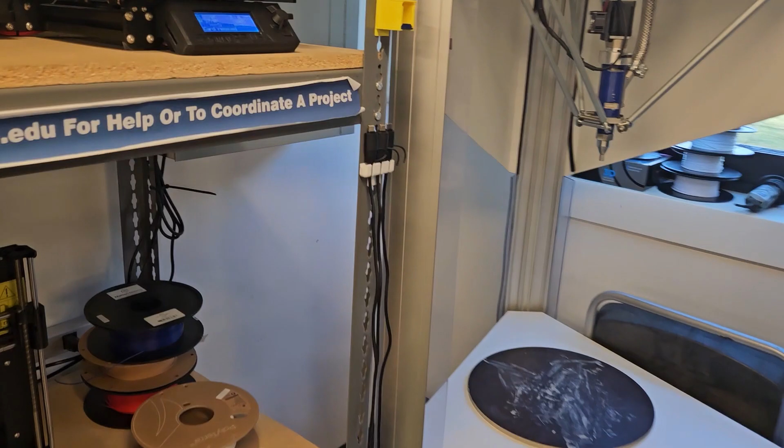So I thankfully have an SD card reader right here on the side of my laptop. Everybody may or may not have this. If you do not have an SD card reader, that is perfectly okay. We have SD card adapters right here hanging on the wall. You just want to take one of these. It's got an adapter on the end of it, so it does USB-C or it does regular USB. I'll plug that in the side just for the sake of showing you.

And I'll take the SD card right here and I'll put it in the side here with the gold pins facing up. So just like that, and there we go. And you'll hear it plug in here. And if this pops up, you want to click on it, click Scan and Fix, and another pop-up will go down here. You want to click Repair Drive, and then hit Close, and it'll open up the SD card.

Now, good etiquette for the print lab here is whenever you plug an SD card into your computer, you take whatever's on it and delete it all. This just makes sure the SD cards are always open and they don't get full of files over time. Okay, we can exit out of that.

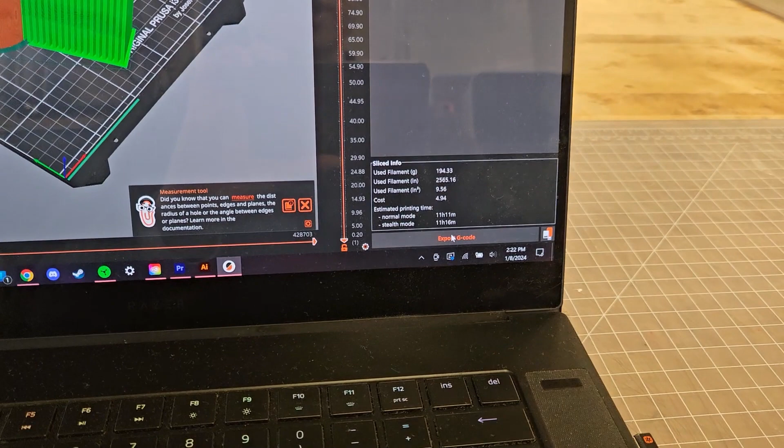And now to export our sliced file, or G-code, this is the type of file that the printer reads. It's completely different from the .3mf file that we saved earlier in the video. This is a completely different file that only the 3D printer can read. Only these files should be uploaded to the 3D printer and put on the SD card. So to put it on the SD card, what we do is we click this little orange button down here. If we hover over it, it says Export to SD card. So we click on it, and it takes us right to the SD card, right?

So what we want to do when we name our file is we want to delete everything that isn't the total time it takes. So right now, we just have 11 hours, 11 minutes, the total time this will take. What you want to do is type in your name, so I'll type in my name, Owen Felty, and then after that, we'll put an underscore, and then we'll put in our phone number as well. So I'll put just a fake number in, just like that.

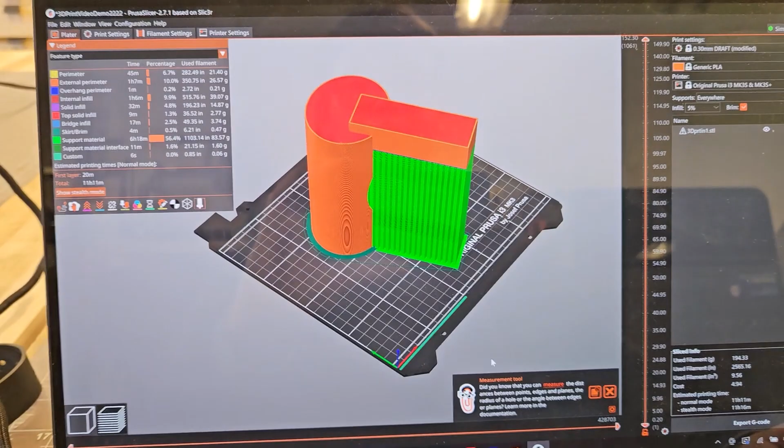This is just in case your print fails and you have already left the lab. We can contact you so you can come back here and we can look over your file just in case anything happens. So we'll hit save. And then right down here, you can see it says exporting finished.

And once the export has finished, you click this little triangle right here that says eject drive, and it ejects the SD card. So we can take this out now, and you can take the adapter out now and go put it back on the shelf over there. So now you have your SD card and you're ready to put it on the 3D printer.

If there's already an SD card in here and there's nothing on here, or the printer's not moving, you can just take the SD card right out and put it back in the little yellow holders up here. Okay? To put your file on, you want to take the SD card with the gold pins facing towards you and put it in this side slot here. You can see it right there, and just put it right in, just like that. And you can see my file is right there.

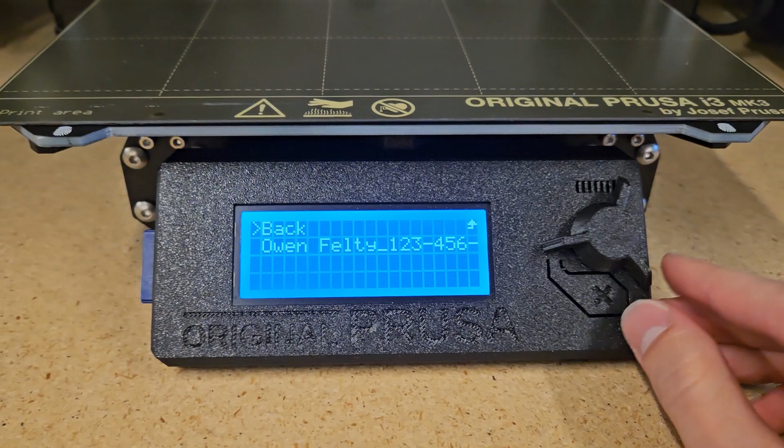It pops up automatically. To scroll, we use this little knob here, and we scroll down. So that arrow goes right over our file, and once it's over your file, it should scroll through the whole thing. So we should see our name, our phone number, and then the total time it will take. To select our file, we press the knob once. This has nothing to do with you. This is just my fault here, so ignore this, and press the knob again, and your print will start.

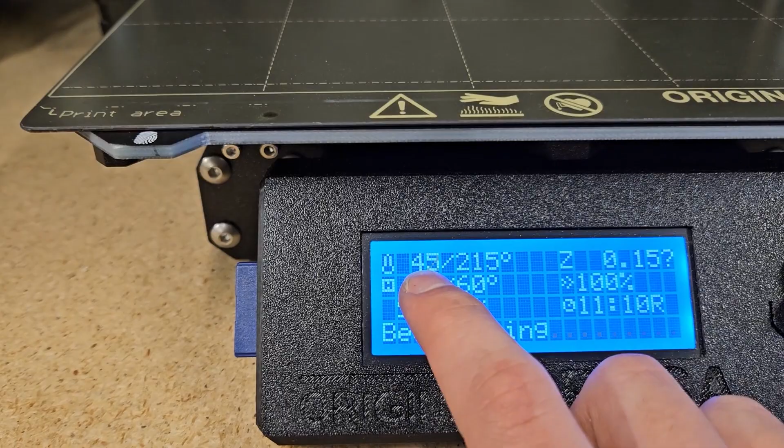So what it's doing now is it's heating that bed, like we talked about in the video. So it's heating it up. You can see here it's at 17 degrees. It'll heat it up to 60 degrees. And you see it's heating up the nozzle from 45 degrees to 215 degrees. You can see right here is your total time remaining, 11 hours, 10 minutes. This will count down all the way to 0 when your print is done. Okay, and we'll just wait for it to start then.

Okay, so our print has started. The 3D printer is first going to level itself. It does this for the start of every 3D print. It levels itself on 9 points across the build plate. If it sees that all of these points are level, then it will start your print. If it doesn't, then please submit a maintenance report. Something is wrong. And you can see here, it's putting just an initial layer of plastic down. It does this to just calibrate itself.

Hey, it's Owen here, after the fact, editing the video. I forgot to mention in the video that you should stay for the entirety of the first layer printing. If there's anything that's going to go wrong in your 3D print, it's going to be in that first layer. So you should stick around, I'd say, for 15-20 minutes. If everything appears fine in that first layer, then you're good to go. 99% of the time, if your first layer prints, your 3D print will be fine. Just wanted to mention that. Okay, now back to the video.

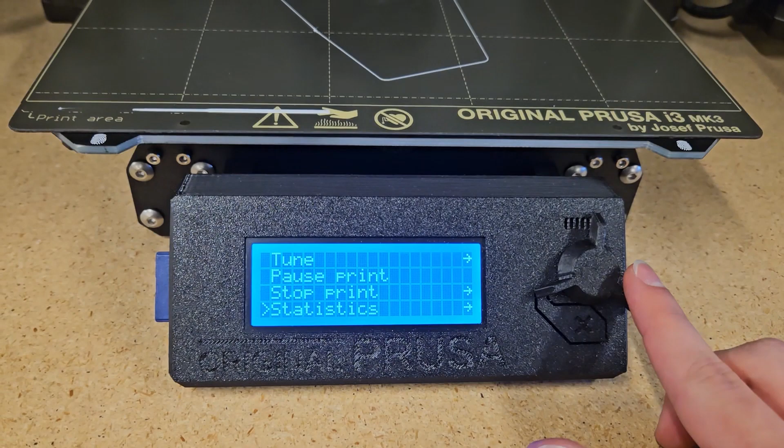And there starts our 3D print. If you start your print and it looks like this, where it's stringing on the edge here, especially when it goes around corners like that, that means there's something wrong with the printer. What you should do immediately is press the knob here and scroll down to where it says stop print and press the knob. And then click to yes.

You need to stop your print. There is something wrong with the printer. Please submit a maintenance report by scanning that QR code here. There's a number for each one of these printers. You'll put in the number at the maintenance report and we'll come and fix it for you.

Alternatively, if you start your 3D print and it looks something like this, where the plastic is smushed into the build plate and it looks like the nozzle is struggling to put out the plastic, or it's building up on the physical print nozzle itself, please click on the knob, scroll down to stop print, and hit yes. And then please submit a maintenance report for this specific printer.

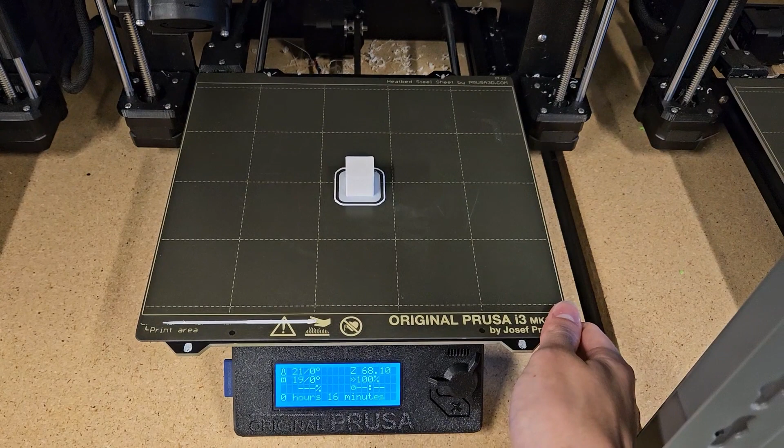Once your 3D print has finished, you can go ahead and take the build plate off the 3D printer. This is very simple. You just take it up by one of these corners that are overhanging right here. You just take it right off. And normally, to get a larger 3D print off, you can bend it. This is kind of hard with one hand, but you can kind of bend it and it would pop off. But for smaller 3D prints like this, it's much better to just set the plate down, grab a scraper from the shelf, and then scrape the print off yourself.

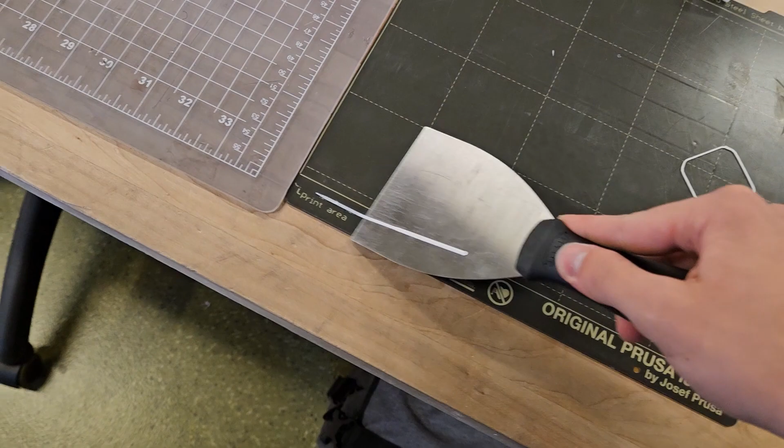There we go. And make sure to get all the plastic off of the build plate, including the little purge at the start. And here you have your 3D print. Now you can take the brim off. This is the brim we added so that it would stick to the build plate better, just with a little X-Acto knife, or sometimes it comes off with just your hands, like this one here. Just like that. Make sure to throw away all your loose bits of plastic.

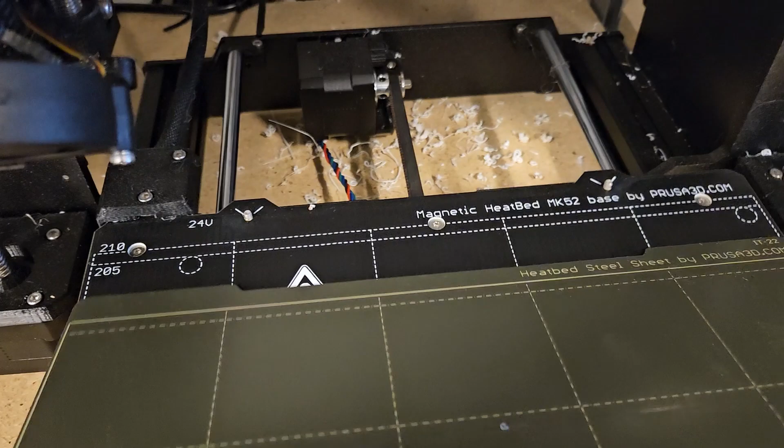Put back the scraper, and put back the build plate. Now you can see the back of the build plate is notched here. These notches align with screws at the back of the 3D printer. You can see they just slot in like that there. So put it in with the back facing to those screws and then drop it down and it's perfectly fine, just like that. You have successfully 3D printed.

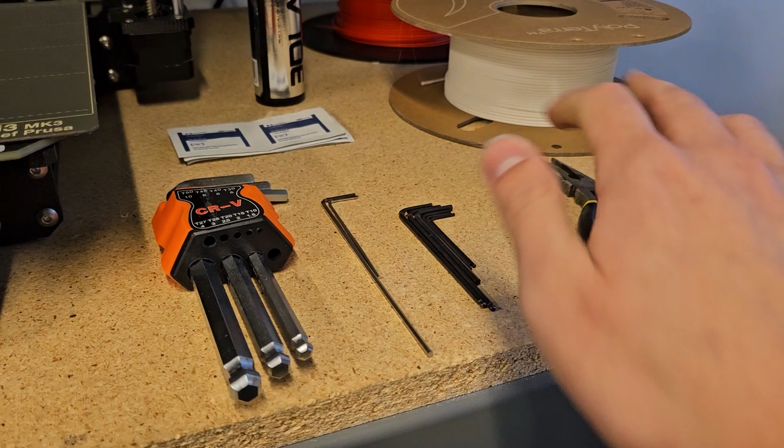Over on this side of the 3D printer shelves, we have a few tools here. These are some pliers. These are handy for getting bits of stray plastic off the nozzle here of the 3D printer, like there. If it tends to gunk up some plastic on the nozzle, you can just use these to take them off. These are Allen wrenches. These are for shop use only, for when 3D printers get broken. These back here are alcohol wipes. This back here is called 3D lac. This is a glue stick.

And here are our stacks of filament here. Behind here are our colored filaments. We only have a few right now. We will be getting more soon. And here is our regular filament, our Polyterra sort of off-white filament that we have at the front. I'll show you how to change filament right now.

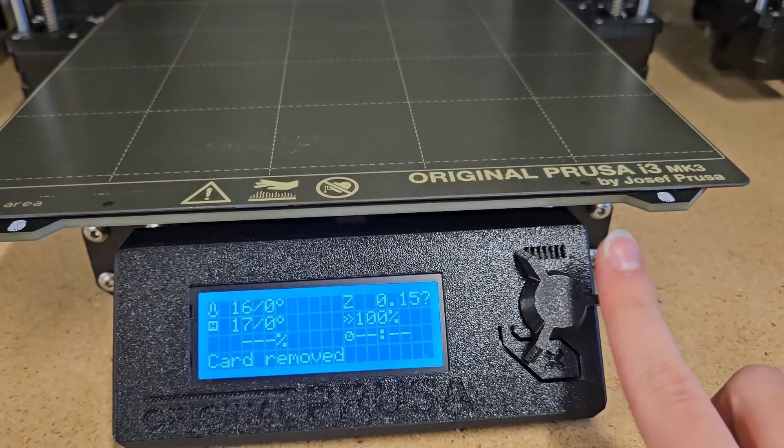So you want to change filament. It's a very simple process. All you have to do is go to our little screen here and go to our little knob that you have here and press the knob. Scroll down to where it says unload filament if filament is already loaded in. If you're on a printer that, say, does not have filament in it, you have to click on the knob, scroll down to where it says auto load filament instead of unload filament.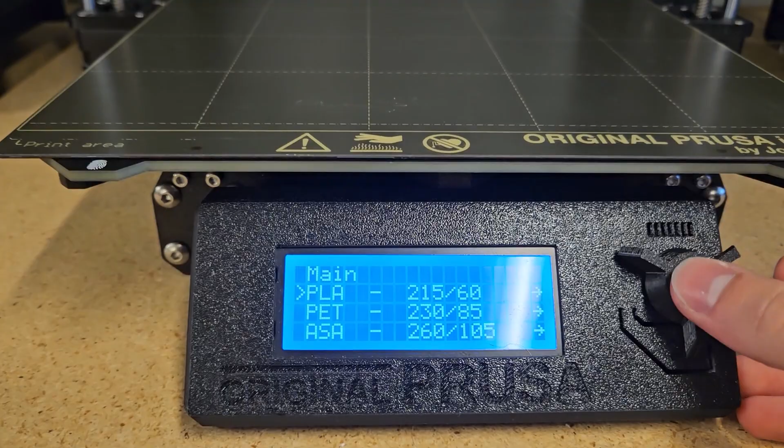For this one that we're using in our example, we will do unload filament because this is the most common scenario. We will scroll down to PLA, just like we selected in PrusaSlicer. It's all PLA filament. So we should select that by pressing the knob, and then it will preheat the nozzle of the printer, so that guy down there. And once it is done, it'll let you know further instructions.

Once the nozzle has heated itself up, you can see here the screen has changed. You can see it's of sufficient temperature, 215 out of 215, and all we have to do now is press the knob to unload filament. So we'll go to our knob here and we will press it. And you can see here it comes out the top of the print head. All we have to do is grab it right here and take it out. You can see it gets a little stringy here. You want to take those off.

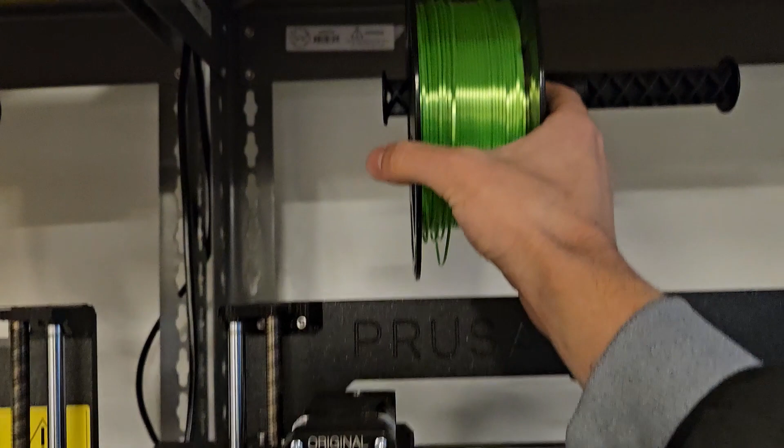And then you want to take your filament here, and if it's a colored spool, it goes back here. And if it's an off-white one, it goes on the front. So this one will go back here. So then we will take our off-white spool here and make sure you find the end of this filament spool here, and we want it going over here. We want it coming down.

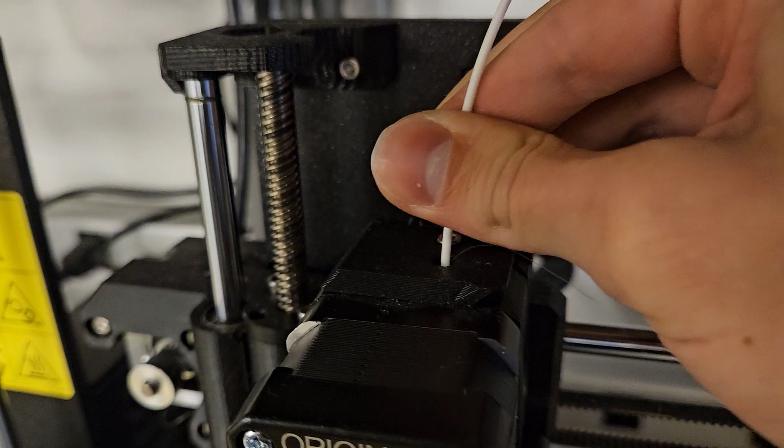So we put the filament on the little holder here. We take the end of it right here and we put it in this top hole. That's right. I know it's a little hard to see, but it's right in front of this screw here. And you want to take it and put it in, and you'll hear the filament go in, and if you put your fingers right here, you will feel it go in as well. And then down here it says loading filament.

And then if we look at the nozzle of the print, you can see it's turning from that neon green color we had, slowly turning to white. Now it will stop after a short time and it will ask you if it's extruding the correct color. Verify that it is or isn't. Ours is not, so we will scroll the knob down to where it says no and then click it.

And it will continue to extrude until it gets us to that white color. It will ask us again. We will click yes, and then we will take off the bit that it has extruded out. And now you have successfully changed filament.

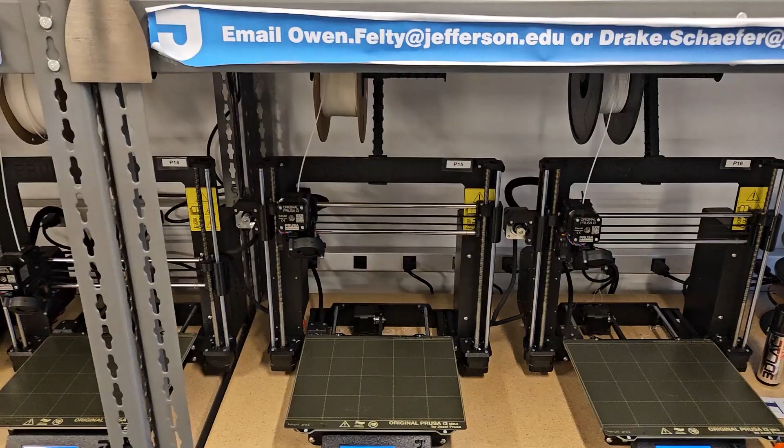Now, if we try and slice something like this by simply hitting the Slice Now button, you can see we get an error message at the bottom right saying no layers were detected. You might want to repair your STL files. So if you put open files into PrusaSlicer, it will outright not slice them. So you need to go back to Rhino and then reslice them. So we can go back to our configuration view here. And unfortunately, what we'll need to do is either delete these or go over here. If you're in the expert settings mode, which you should be in, you should be able to see all of your objects here, and you should be able to see the errors that you're getting here.

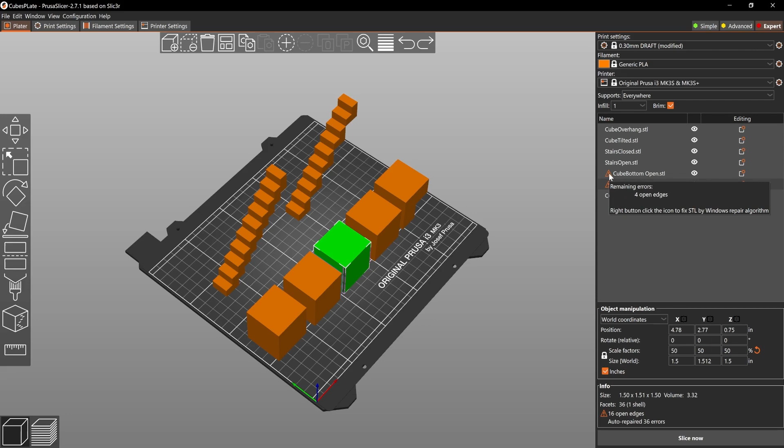Now, normally, I would much rather you just delete these objects by clicking on them and deleting them. But in rare cases, if you've gone back into Rhino and you've repaired your entire model and it's still coming in as open in PrusaSlicer, what you can do is hover over this triangle and right-click, and it will repair your model automatically. But this takes some leeway. It doesn't always do what you want it to do. These obviously are just little simple cubes. It's very easily fixable for the program.

But maybe it does something a bit wrong and it messes up your print. That's something you don't want. So you want to have precise control over which edges are closed and where they're closed, and you can do that in Rhino. This is sort of a last case. If you're really, really desperate, you should do this. Right now, I'm just going to take these and delete them simply by clicking on them and pressing the delete key. And you can bring models back in again with the cube and the plus sign. And these are multiple models as well, so you can bring multiple models into your PrusaSlicer build plate here.

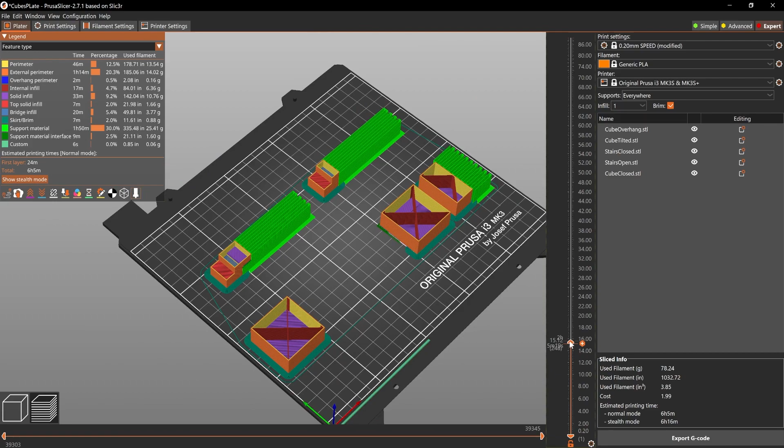Now if we slice it, we can see a few things. First of all, we can see the support material that has been generated because I have supports everywhere. We can see the brims that exist around the bottom of each object here because I have those selected. And if we scroll down, we can see the small amount of infill because I have a 1 infill here. Very, very low infill. Okay, but this first cube right here is perfect. You can see the brim wraps entirely around the object here, and the skirt on the edge goes around it as well. So it's not off the surface. If we scroll all the way to the first layer here, we can see that it's perfectly flat. No problem. Same thing with the stairs here. Perfectly flat, brim wraps all around, no problem.

But this cube over here is the skewed cube. This is the one we performed the Orient 3-point tool on. But this one I just brought into Rhino and skewed, so I could demonstrate it for you. You can see the brim doesn't wrap around the entire bottom edge here. It actually stops right here. And we can see also that the top is slightly angled. These are clues to show you that your model is not flat. And if we scroll all the way down to the bottom, we can see that it should be exactly like this here, but it's not.

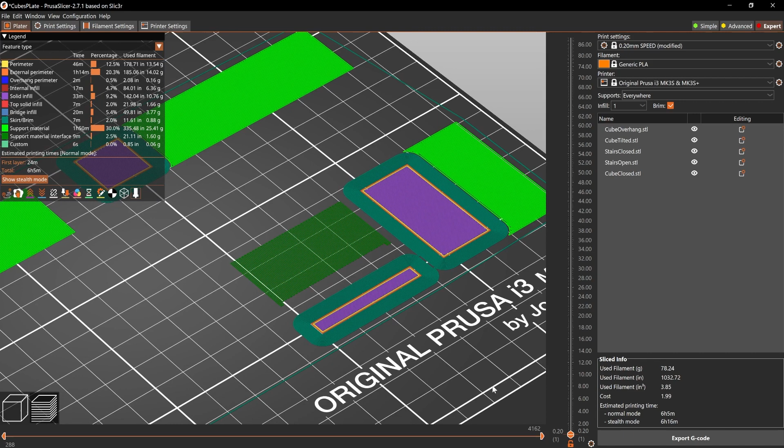It's slightly skewed, and it's actually angled on the bottom, so it will build up angled. Luckily, this model has been interpreted by PrusaSlicer, so it puts support material underneath. Not all models will do this, and it will be catastrophic for your 3D print—it will not work. So save yourself the headache and just make it flat in Rhino before bringing it in.

We can see with our last example here that an overhang is being created. What we can do to negate this overhang is simply click on it, use our Place on Face tool, and click the bottom face, which rotates it completely 180 degrees. When we slice it again, no supports are needed there—it just saved us probably 10 or 20 minutes of print time, and you can see it's flat on the build plate again.

Very, very important—these are a lot of the problems I see in the print lab, people bringing in files that are not flat. Make sure they're flat. For things like stairs, I kind of told you this in Rhino already, but...

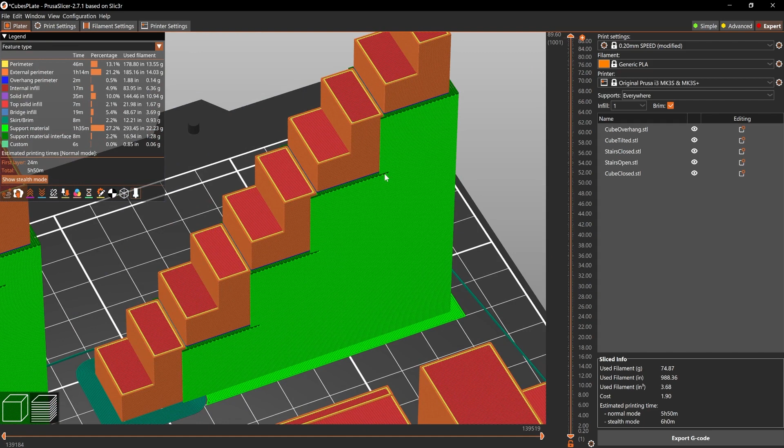Here you can see it actually illustrated. This is the continuous surface version, where I move the block underneath each stair to make it one continuous solid. And here you can see each individual stair printing separately—it's not a staircase, it's just one stair after the other. So you need to make sure it's a continuous solid, and not just individual little units sitting next to each other.

Also, with these stairs I would highly suggest rotating them onto their side. You can do this either with the Rotate tool, holding left click, and snapping it 90 degrees on its side so it snaps to the bottom of the build plate—here you can slice it and see it's flat, with the brim wrapping all the way around. Or you can click on it, go to the Place on Face tool, and click the face you want on the build plate, which does the exact same thing.

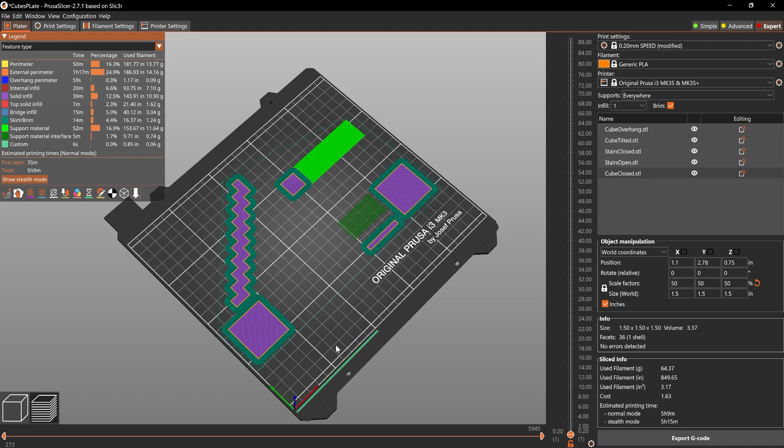So to try and prevent this from happening, go up to Print Settings, then down to Speed, and find where it says First Layer Speed. Instead of 20, we can set it to 15. Then go back to Plater and slice again, since we changed the setting. This will add a bit more time to your print—it varies a lot depending on size, but probably about 20 to 30 minutes. It will slow down the print head on that first layer so it can really precisely and steadily lay it down, because the faster it goes, the more aggressive it is, and the easier it can rip that first layer off. If it goes nice and slow, back and forth, it can take its time and make sure all that plastic is sticking to the build plate.

What else we can do is go to Filament Settings, then to the Temperature section, under Bed. Where it says First Layer, we can bump it from 60 to 70 degrees. Each build plate on a 3D printer is heated, so when plastic is deposited onto it, it's nice and warm and sticks well. If you put a hot piece of plastic on a cold build plate, it will not stick—it'll just come right off. If you put a hot piece of plastic on a hot build plate, it will stick there very, very well.

If we up the build plate temperature even more, it will stick even better. The maximum I would go with this is 80 degrees. If you're having minimum trouble with build plate adhesion, I would just bump it up to 70, as well as bringing down the first layer speed. The minimum I'd go with that is 10, and the maximum for build plate temperature is 80. Now don't change this one over here.

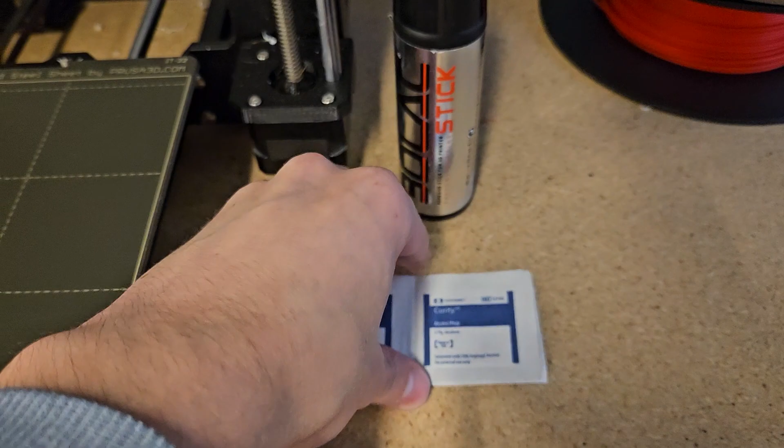Now that we're in the laser lab, I can show you how to use this 3D Lac stick. But before we get to the 3D Lac, I'll tell you about these - alcohol wipes. If you're having trouble with build plate adhesion, you can use one of these. You just take them off from the pile there. There's usually a good stack, I keep them pretty stacked up.

You rip it out of its little pouch, and it looks something like this. Then you take it and wipe the build plate down with it, just like you're cleaning off a table. You want to make sure you get the entire surface nice and clean, and make sure there's no residue from other prints on there. If you have to use more than one to get it fully clean, then please do that.

If you have cleaned off your build plate and it is still not sticking and you have tried everything else, the absolute last resort is to use this 3D Lac stick that is sitting right over here.

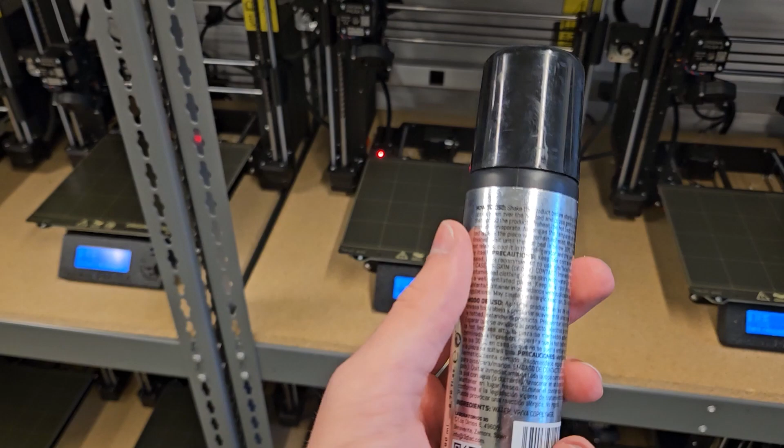To utilize this stick, there are instructions on the back in case you forget, but to use it you have to shake fairly thoroughly, and you have to take this cap off. Now it is fairly similar to a bingo stamper in operation.

You have to put it down and hold it there while putting pressure in the middle of the build plate here. I'm putting constant pressure on it, and you can see it should start putting the glue out. There we go, so there it is - you can see it just barely there on the camera.

But apply this glue only to where your 3D print will be on the build plate. So if it's a big square like this, then put it there. It shouldn't be all the way out here on this corner and this corner and this corner and this corner - only where your 3D print will be. Don't use it excessively, okay?

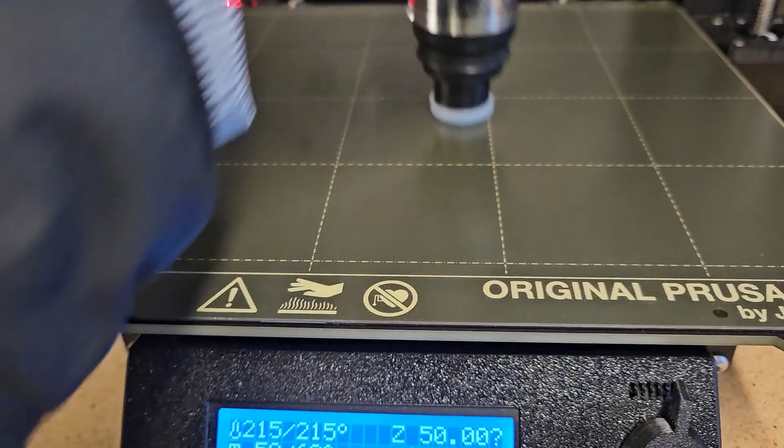Make sure to just keep putting constant pressure on that build plate, so it keeps bringing that glue out of the bingo stamper. Now that we have it here, we can put the cap back on and put it back over here. Then what you have to do is just wait for it to dry, and then you can start your 3D print again.

And if all else fails, if that does not fix your build plate adhesion issues, please send me an email or submit a maintenance report for this specific machine, and we'll get to it.

So that does it for a basic 3D printing tutorial. There will be supplemental tutorials on how to use our powder printer, our Bambu printer over there, our clay printer, and maybe eventually our large form factor Modix printers.